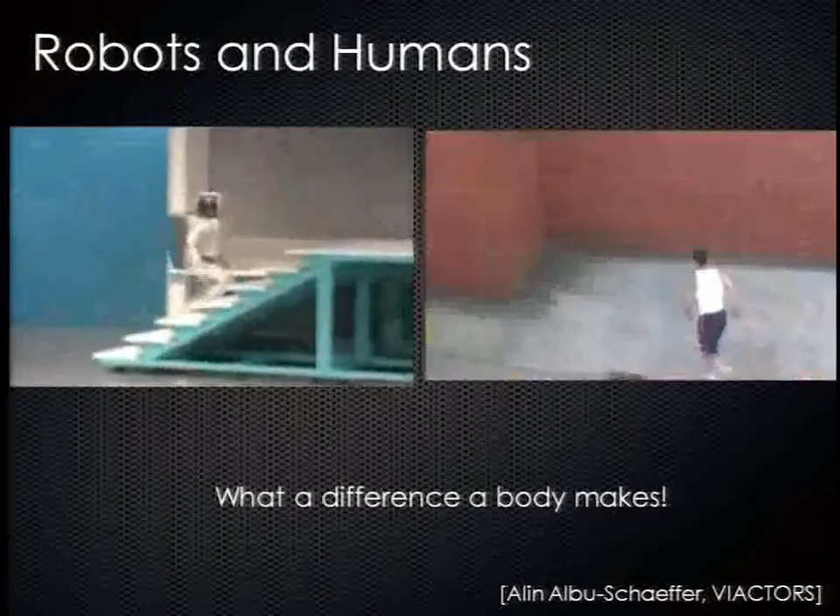This is a slide I borrowed from Alin Albu-Schaeffer, who has led a project on actuation and natural motion of robots for some years with us. The difference is the body.

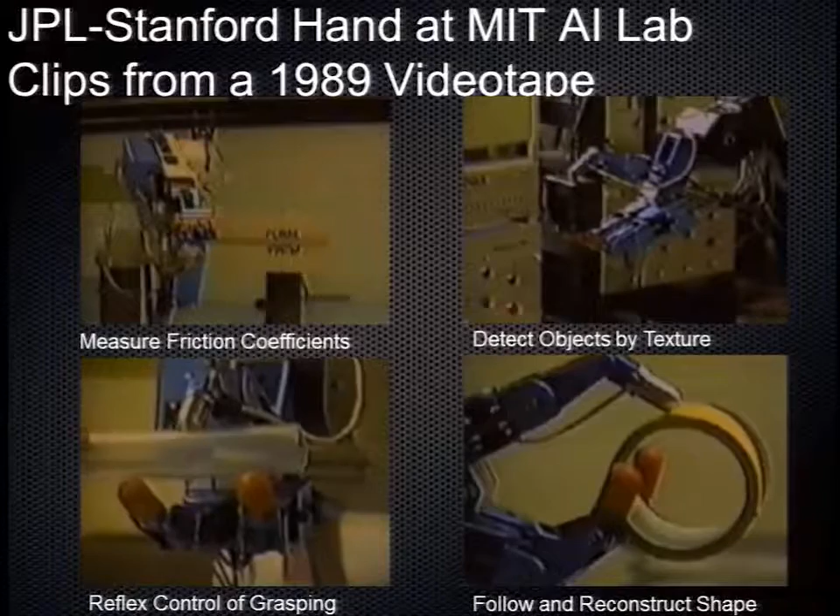Another topic of the talk is human hands and robot hands. We have seen robot hands of different types, some very beautiful hands, some being made now, some go back in the past, and some of these were really exceptional engineering feats. For instance, the JPL Stanford hand at MIT AI in 1989 was already capable of measuring the friction coefficients of objects by sliding a finger with a sensor, detecting objects by texture, controlling with reflex grasping, or following and reconstructing shape. This was back in 1989.

So why this kind of hand, or the other beautiful hands that we have had, didn't make it to the real world? You don't see them in industry, you don't see them in real applications, you don't see them in service. What is the reason?

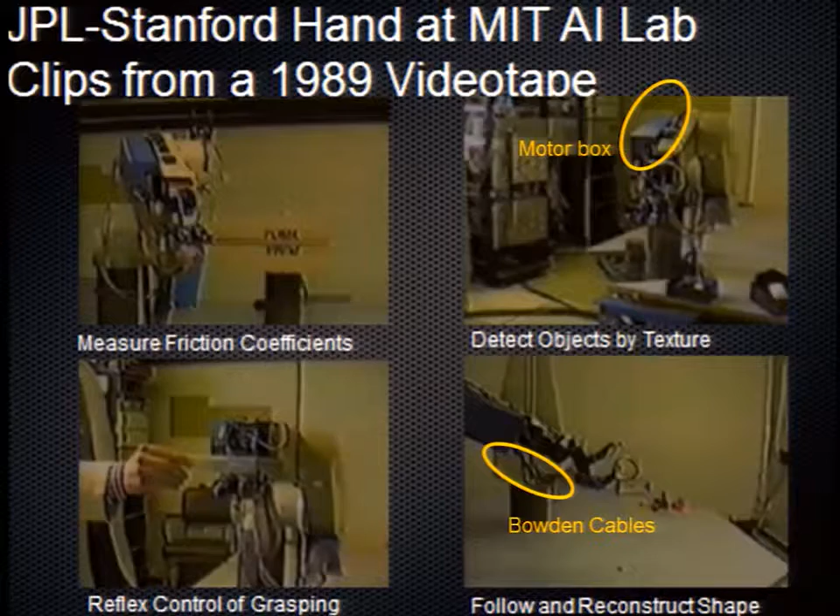Part of the reason is that machine motion is not good enough. At that time, we had a motor box that was much larger than the hand itself, Bowden cables that would break very often, unfortunately. But even today, recently we have made this hand that's rapid prototyping, more modern design.

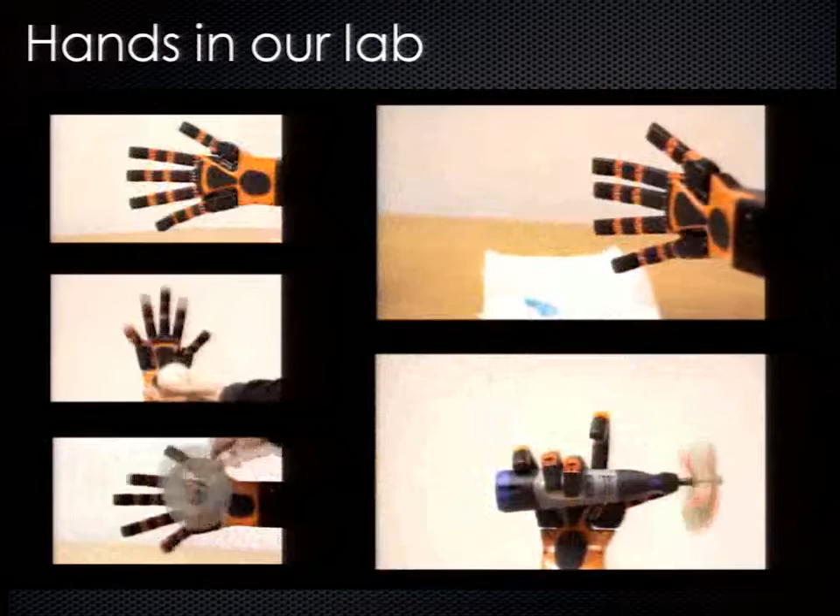You can do nice things. You can handle different objects. You can also manipulate a little bit, like a syringe or a Dremel. But things that are untold very often is that still the motor box is large, the tendons are fragile, and the programming of this hand takes a long time.

Now, programming might not be a big problem. If you are very good at programming, computational power is very cheap now. If you compare to yesterday's Pumas, for those of you that are old enough to remember, in a Puma we had 160 kiloflops back in the 80s. But today, the dumbest smartphone has 40,000 times the same computational power. So machine intelligence has gone a long way from there.

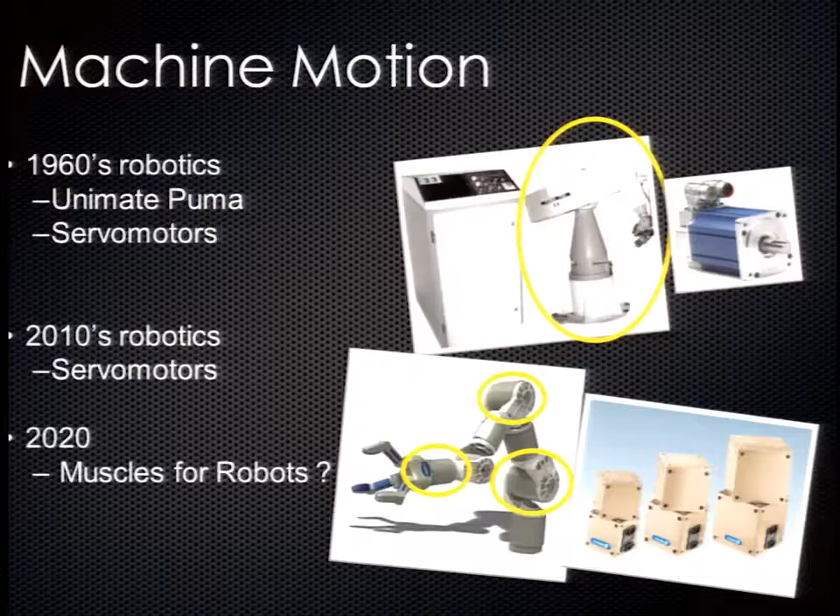But if you look at machine motion instead, in the 60s the Puma had servo motors, and in 2010 most robots have servo motors. We didn't make much advancement. I think it's time to move forward. By 2020, maybe we will have something different, maybe muscles for robots.

The body makes a big difference, and intelligence is related to the body. I don't believe in intelligence per se. I believe in robotics, the intelligence has to be embodied, at least in part, and I will argue on this.

Embodied intelligence, if you ask a philosopher, is the theory of having cognition that depends on the kind of experiences that come from having a body. And it concerns the fact that the very structure of reason itself comes from the details of our embodiment. But concerning the hand, for instance, there are claims that the modern human brain came after the hominid hand, meaning that the hand shaped the way we think and do things.

This actually goes much farther back in the past, to the 6th century before Christ, and Anaxagoras thought that man was the most intelligent of animals because he had hands.

What is embodied intelligence in a more precise sense? This is my definition. There are plenty of definitions, so I just said, why not one more? Property of a physical system, the body, to adapt and interact with its environment to naturally produce the desired function.

Body, environment, natural motion - I underscore this. Body plus environment make a function. I'll come back to this later on. How far are we from implementing any of this natural motion?

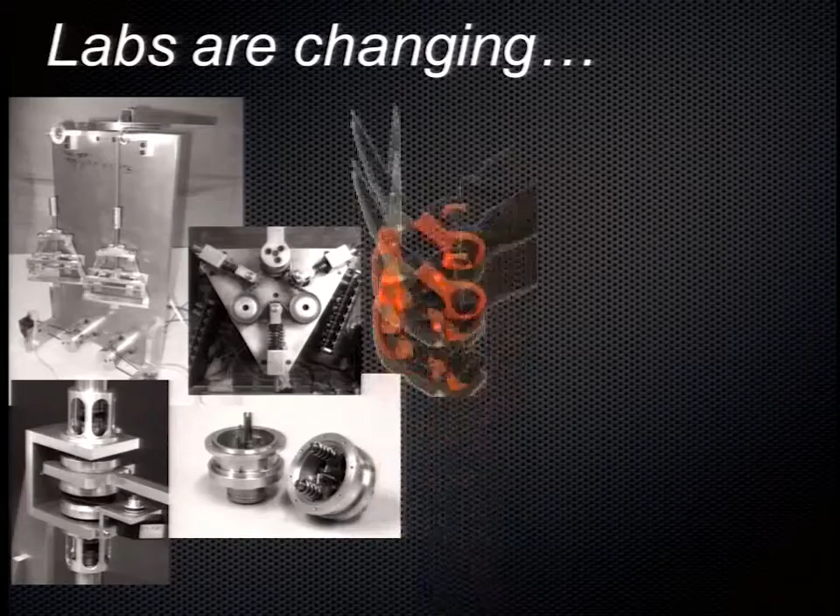There's some good news. We have been stuck for a long time with servo motors, but labs are changing quickly. These are pictures from my own lab a few years ago, and these are new things that happened in the last few years. It's much more colorful, for one thing.

The reason is new technology. Additive manufacturing is important - there are many different brands and things available. But also new embedded microcontrollers, the Arduino style, new sensors, magnetic sensors, Kinect - all those things we dreamed of some time ago. Hardware in the loop tools, new operating systems, software, middleware, toolboxes, ROS, YARP. Those things are making the cycle of innovation so much faster than we were used to, so things happen in the lab at a different time scale.

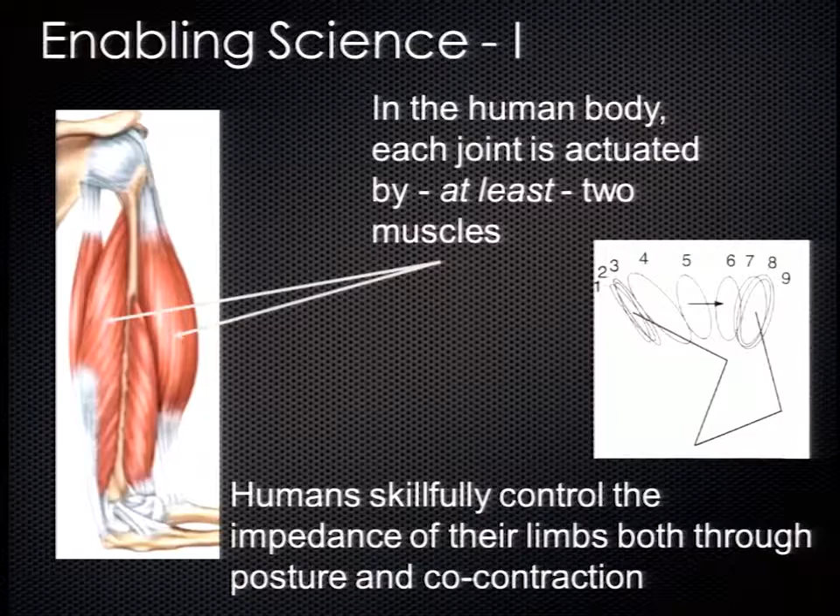Not only enabling technologies, there are also enabling science results that are changing the landscape. For instance, understanding how humans move helps us a lot. Everybody knows that each joint in the human body is actuated by at least two muscles, and there is a wealth of results on how humans skillfully control the impedance of their limbs through both control of posture and co-contraction of the muscles.

And there's another result from science I think is very important to us: synergies. Many functions of the human body require coordination of a large number of muscles. So in emitting a single phoneme, ba or pi, I'm using something like 40 muscles, going from the mouth to the tongue, to the pharynx, to the diaphragm, all coordinated to do ba instead of pi. So you may wonder, how can people speak and know what they're saying at the same time? Maybe not everybody, but...

There is scientific evidence for the existence of sensory-motor synergies. All of those muscles move together because they are considered as one unit by the central nervous system. So you don't have to think of this co-activation.

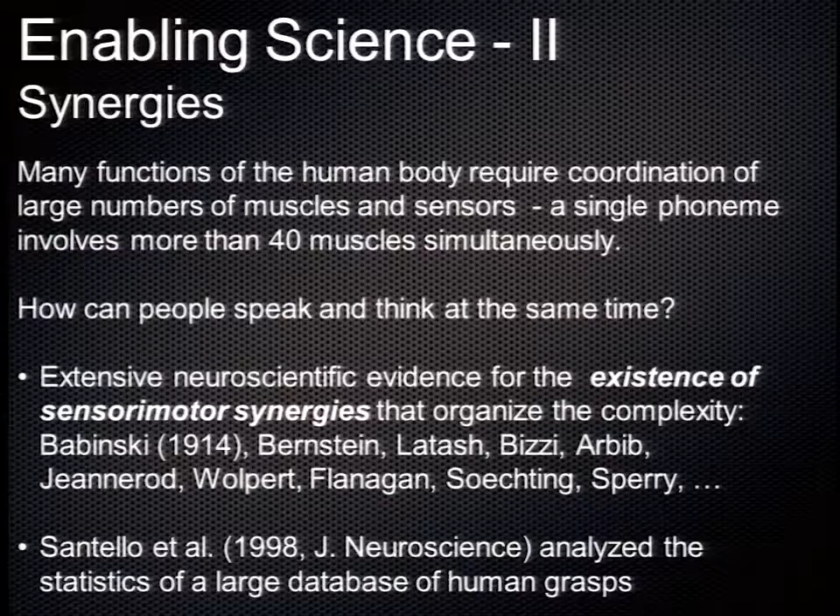For hands, Santello, Flanders and Soechting in 1998 analyzed the statistics of a large database of human grasps, and they came up with the idea of postural synergy. This is very simple: you look at the covariance matrix of how the joints move in a human hand during everyday tasks, and you take the principal component. You call the first principal vector the first synergy, and so on. If you use the first, second, and third synergy together, you build a subspace, and if you move in this subspace, you already explain 90% of the covariance of everyday grasp. Using just the first one, you already get 50% of the covariance.

It's a lot. So the problem is how to make robots that are soft yet strong, simple but also dexterous, intelligent, and practical. Our approach is mixing soft robotics technologies with the theory of human synergies.

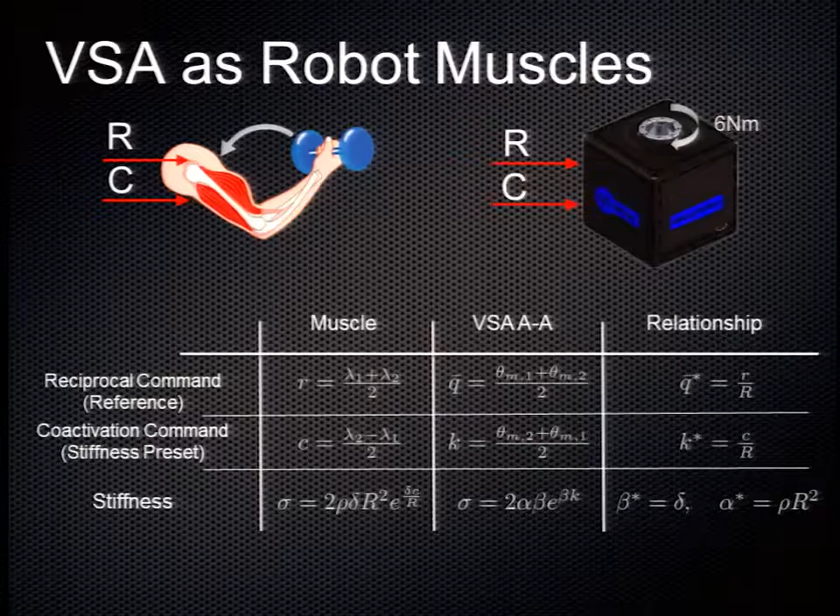So from the original models, we've been moving the scene forward - not just us, there's a whole number of people doing this. Series elastic actuators were introduced in the 90s, and more recently variable stiffness actuators, where motors can change not only their position but also their stiffness. In a way completely similar to the human joints, you can control the reference and the co-activation. In motor control, people call those reference and co-activation signals R and C, using lambda from Feldman's theories to define this. But in this motor, you can use exactly the same thing - you can control the servo motor with exactly the same inputs.

And you can choose the springs - this is the device we developed in the lab. You can choose the springs so that the characteristics are very similar to those of human muscles. That's why we call them robot muscles.

We have been seeing many devices, we have been designing many devices, and it's still important to go forward and build new actuators. But it's also time to move forward, in my opinion, and I believe that naturally moving machines might have more applications than we imagine.

So we started with this idea of crowdsourcing the exploitation of the technology, making it readily available, creating a community, sharing fully the design - fully open hardware and software, making it simple to program, modular hardware and software, low cost - so that everybody is able to use variable stiffness actuators, or muscles, to build their own robots.

So that's why we started this natural machine motion initiative to foster the diffusion of soft actuation for robots that move like we move. Here is the website we've started. You can put there your own drawings of your own device, schematics, instructions, actuators, accessories, or you can download and print out that cube I showed before and use it in your lab.

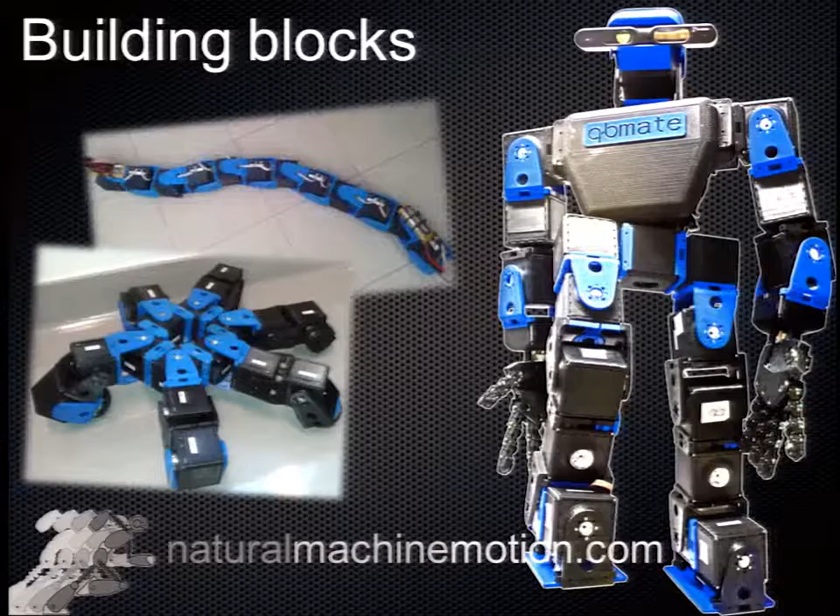Those cubes can be used as building blocks for doing a snake, a hexapod, or a humanoid that has the possibility of controlling the stiffness while it moves, co-contracting just like humans do.

But let's go back to hands. The first synergy alone explains 50% of the covariance, so we say, why don't we start from there? If you move a hand according to the first synergy alone, you have a single degree of freedom, basically. It's a subspace where you coordinate motion.

That is not enough. The idea of synergies alone is not enough to grasp an object, because if you close your hand, either you're not grabbing the object, or if you do, you crush it. That's not the point. So putting together soft technologies and synergies, you can explain perhaps how you can control the hand.

So the idea is that you have this reference position, the mesh hand, and the real hand. You can control the reference R on this manifold of the synergies, and then the stiffness. So the force is generated via the error between the real hand and the reference hand, times the stiffness that you control. This sounds like a nice idea.

Can we implement it? From theory to practice, there is need for some more radical changes in the design. So we started implementing a new hand that substitutes joints with roll-articular pairs and has ligaments that are elastic.

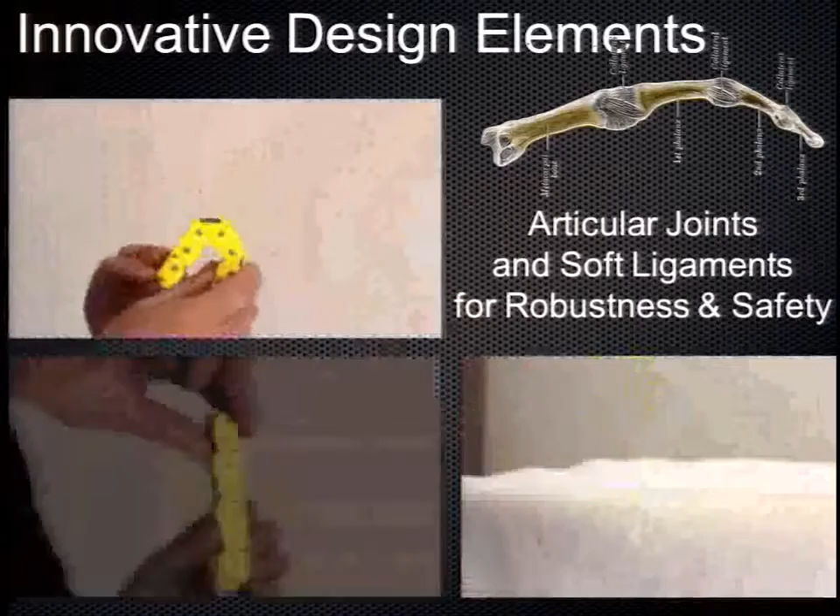So each finger can be deformed, can be almost torn apart, and goes back in position. So it can withstand impacts. This is the Pisa-IIT SoftHand that we put together.

And here are the very first experiments with that. The hand moves and can comply with different objects. You can observe that the shape of the hand is different depending on the object itself.

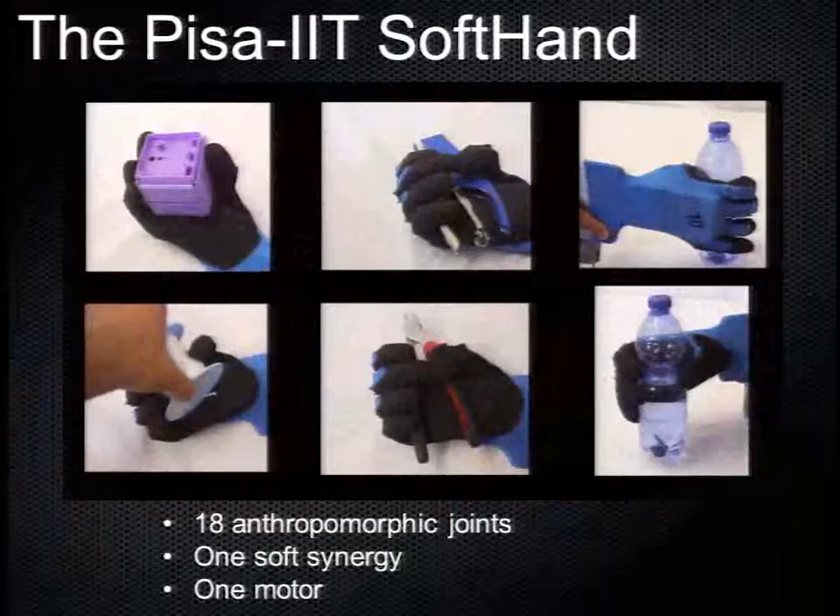The hand has 18 anthropomorphic joints, one soft synergy, one motor. Here is the hand grasping different objects. And here it's grasping handles.

The hand can be mistreated, even severely. You can slam it on a very rigid environment.

Now, how do we use this kind of hand? We thought it was interesting to learn from humans how to use a robot hand. So we made a little interface for a human to use the hand.

It turns out that humans can use the hand in a very natural way, as you can see here. Possibly it's the fact that the hand is so anthropomorphic, not only in the way it looks, but also in the way it moves, according to this first synergy, that makes it fit the body schema of the person.

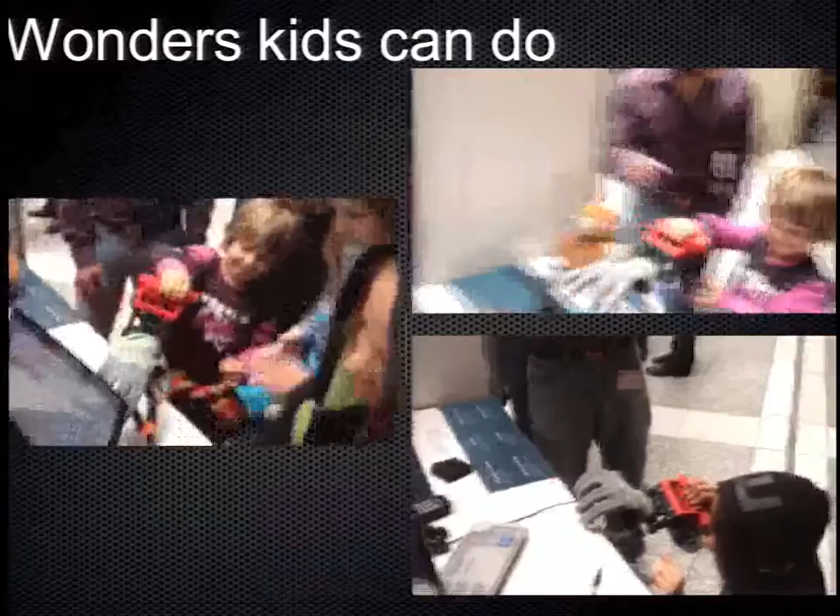And kids can do wonders. We were very surprised by this, and we learned a lot, because kids were able to do things we never thought the hand could do, like picking a coin from a table.

And they were using deformations of the hand, purposefully, they would deform the hand to do the task. So we started using this idea, and then we went further.

You can use the hand as if it's your own. Recall that the hand has 1 degree of freedom, 1 motor, but has 18 joints. And you can deform the hand on purpose for doing tasks.

So, for instance, you can push the hand against the environment to shape it. You can grab a ream of paper. And then, in the same way, you can also softly take one sheet of paper out of the same ream.

Pushing a button was not originally planned in the design of the hand, but you can do that. The hand is pretty strong, so you can also use the fire extinguisher, which is 10 kilograms heavy.

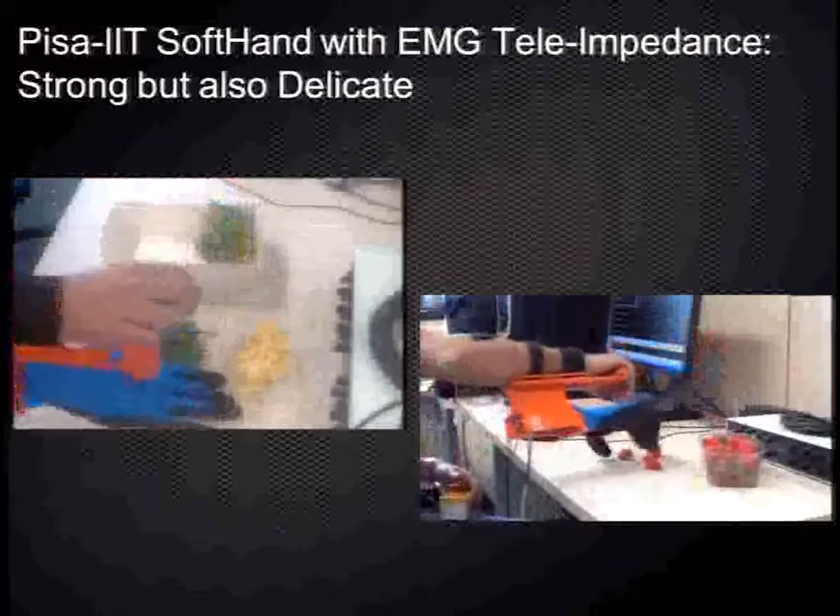The hand can also be delicate. If we control both the reference and the stiffness, we can do things like handling strawberries or noodles like this. And finally, you can get some dexterity by exploiting the environment constraints.

So this is the key message, I think: if you exploit environmental constraints, you can do things with hands that you probably didn't think of before.

So the question is, can we program a robot to use a soft, simple robot hand as effectively as humans do? Using simple, soft hands changes the grasp planning deeply, I think. Thinking of where to place your fingertips for maximizing force closure measurements, for instance, might be less important. I've been working on these problems for years.

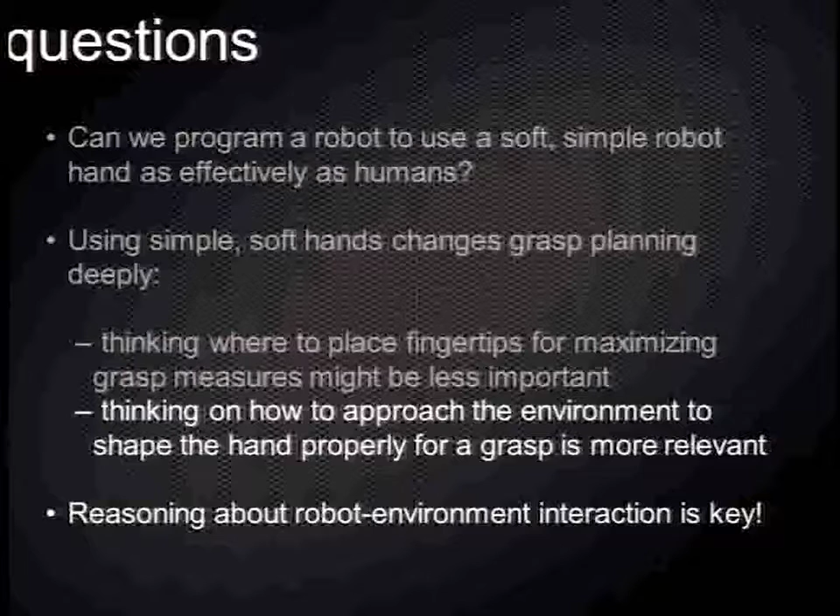But if you look at the classical literature pictures, what strikes me is that in all of those, there is no hand, while hands are central, and the physics of them is important. Thinking of how to approach the environment to shape the hand properly for a grasp is more relevant. Reasoning about robot-environment interaction is key to me.

So here is one example of what I mean. This is a very simple example. You are grabbing the mug with the same hand, the same object, the mug, and the same on-off control. But once you are taking it from the top, and once you are taking it from the side, it's 2 different grasps, and you can see that the hand does 2 different things depending on the affordance.

So the control is the same. The control is open or close, as simple as that. The hand has 2 different shapes. So programming time is 0 - well, I shouldn't say so. Programming time is what it takes for you to know where to put the hand at the very beginning. This is what I call body-environment interaction that gives you a function. This is what I call embodied intelligence.

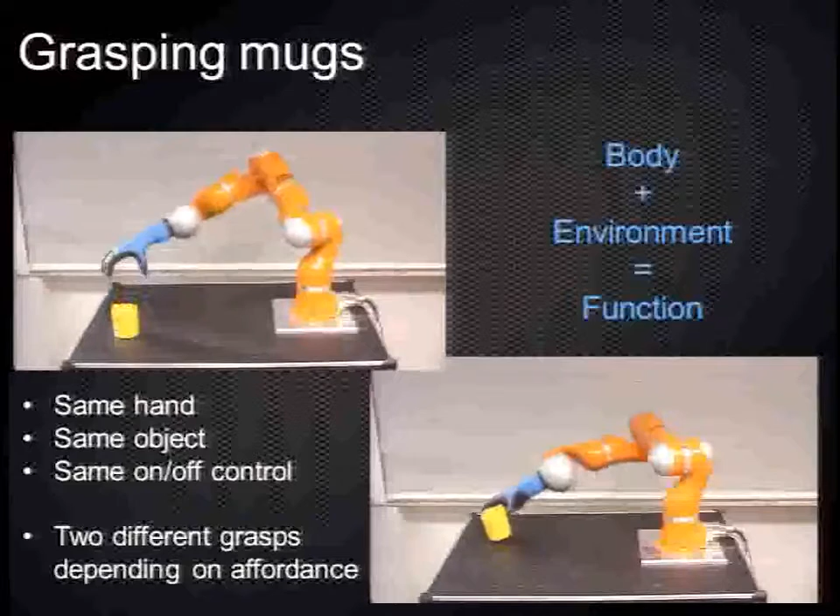Let me close with an application I'm very interested in these days: the SoftHand. This is in collaboration with some hospitals in Italy and also in the United States. The hand is very simple and probably robust and low cost enough to be useful.

And here you can see the first experiments with amputees that are using the hand. These are very preliminary results, so the hand is still to be optimized, but you can see that they very quickly learned how to use this hand, and they're very happy.

Here are a few more. You can use the hand as if it were your own. It moves like your own, and you can do things like managing tissues or a group of cups. Here is the hand opening, turning a key, and opening a door.

There's a lot of work to do, but we believe that this will impact somehow the possibility of giving hands to people at a reasonable cost that are robust and can be useful and have an impact on real life. These are the people that have done most of the work, and these are the sponsors, and thank you for your attention.

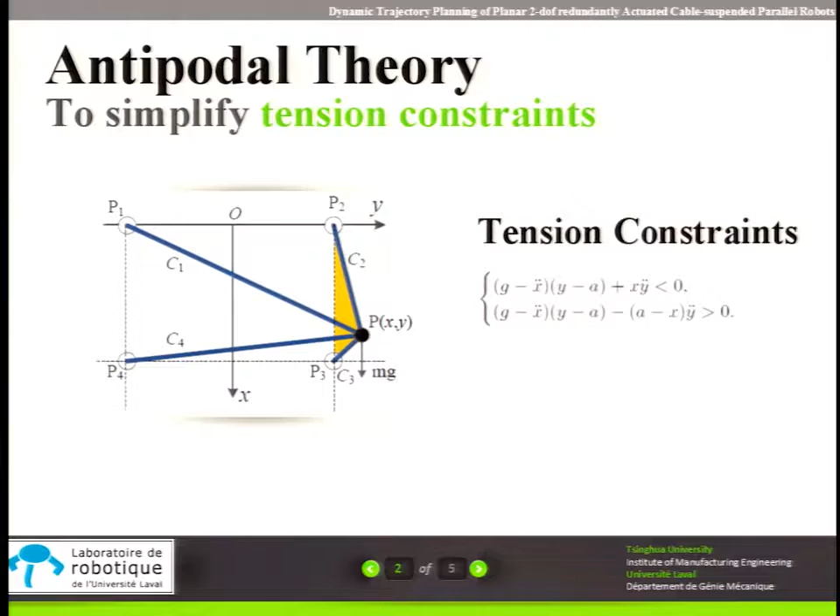For instance, considering the configurations in the left figure, cable 2 and cable 3 form a sector containing cable 1 and cable 4. If the cables at the boundary of the sector are in tension, then the cables inside will be in tension as well, automatically. So the 4 cable constraints can be simplified to only 2.

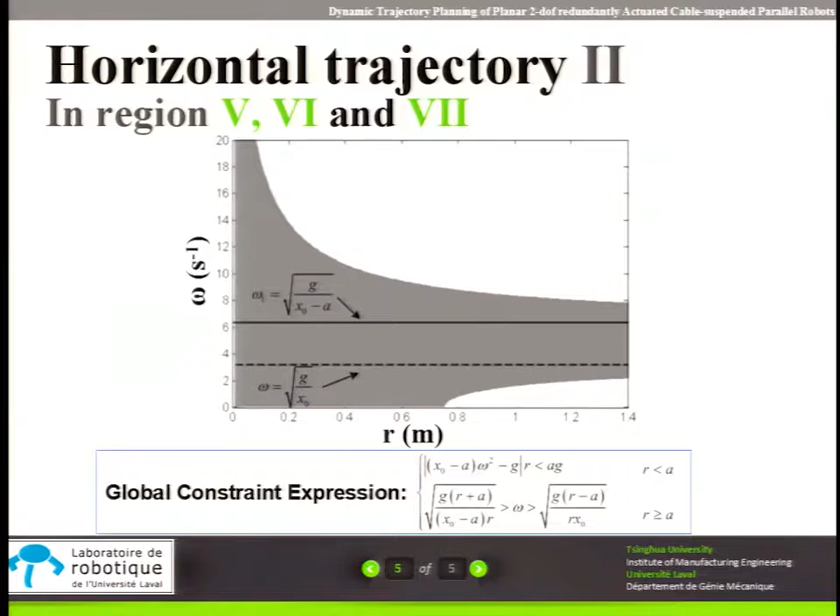Compared to previous research, we can conclude that redundant actuators can greatly enhance the capability of dynamic trajectory planning for cable suspended robots. If you come to see my paper, I can show you some videos of experimental validation. Thank you.

Hello everyone, my name is Hamed Khakpour, and today I'm going to present the work I have done with my supervisor, Dr. Lionel Birglen, from Polytechnique de Montreal. It's about augmentation of the workspace of a spatial cable robot with 3 degrees of freedom using a differential system.

As everybody knows, cables can only pull objects, not push them. So in a cable robot, to fully constrain the moving platform with n degrees of freedom, at least n plus 1 cables are required. It's also shown in the literature that if more cables are used in the structure of a cable robot with proper design, a larger workspace can be expected.

However, using more cables results in using more actuators, which itself results in higher cost of the robot and more complexity in controlling the mechanism. So we have proposed using differential systems in the structure of cable robots to improve their workspaces while keeping the number of actuators at a minimum.

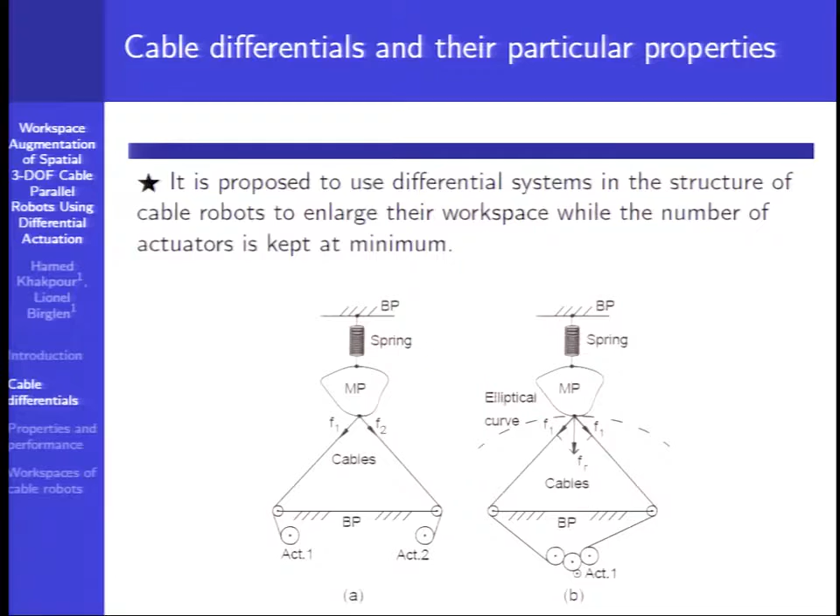We have shown that there are some differences between their performance with respect to the fully driven one, and this is discussed more in the paper. These cables have some particular properties which are helpful in the design of cable robots.

In this work, we have mainly focused on spatial cable robots with cable mechanisms, and we have shown that these mechanisms work similarly to a single cable system in which the attachment point to the base platform is moving on a plane.

We have used this cable differential in the structure of two cable mechanisms. On the left, you can see a cable suspended robot, and on the right figure, you can see the fully driven, fully restrained cable robot.

We have calculated their workspaces—the wrench closure and wrench feasible workspaces—and compared them to those of fully driven cable robots with similar structures and the same number of actuators. We have shown that using these systems, we can achieve better and larger workspaces.

I would like to talk more about this work in the interactive session, and I would be happy to see you there. Thank you very much.

Hi, I'm Shouhei Shirafuji, and I'm a PhD student at Osaka University. The title of my paper is Tendon Routing Resolving Inverse Kinematics for Variable Stiffness Joint.

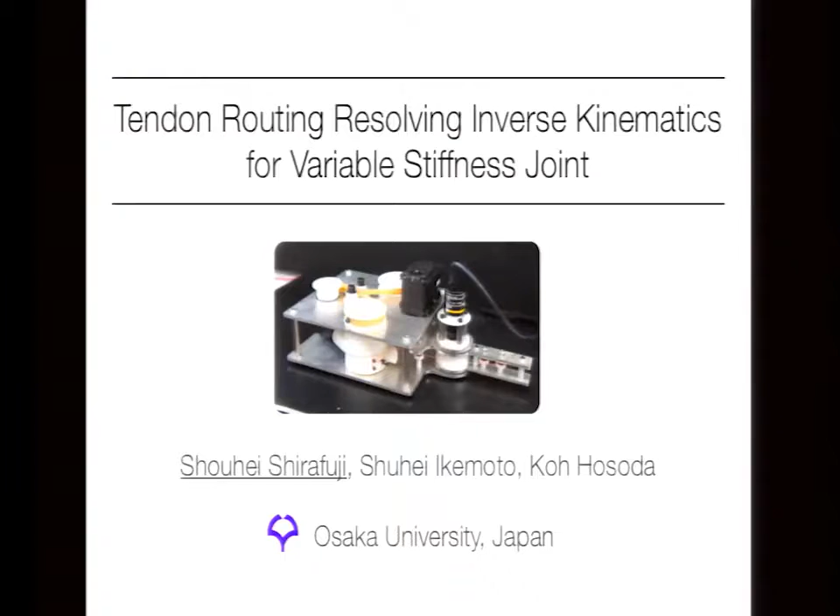Variable joint stiffness is one of the important functions of the human musculoskeletal system to accomplish various tasks adaptively. One of the typical methods to realize variable joint stiffness is using a tendon-driven mechanism and nonlinear elastic components. In this method, the joint stiffness is adjusted by pulling several nonlinearly elastic components, preventing movements of the joint, as shown in this figure.

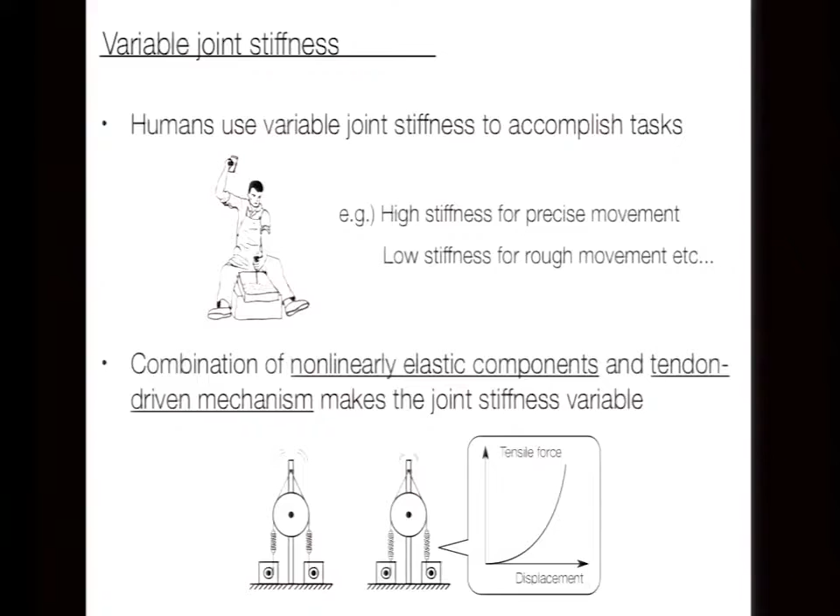We have to control motors to adjust joint positions and stiffnesses, considering the complex relation between the joint positions and joint stiffnesses carefully. The control of them would be simplified if there were a mechanism to separate the control of joint positions and stiffnesses mechanically.

In other words, complex calculation is not needed if we can control the joint positions and stiffnesses by separate motors independently. In our paper, we propose a methodology to construct such a mechanism, which we call tendon routing resolving inverse kinematics. In short, we call it TRIK.

This is one example of TRIK for a manipulator with 1 degree of freedom and nonlinear moment arms. TRIK is composed of step pulleys and moving pulleys. We can adjust joint positions and stiffnesses of this manipulator by driving two separate motors through the proposed mechanism.

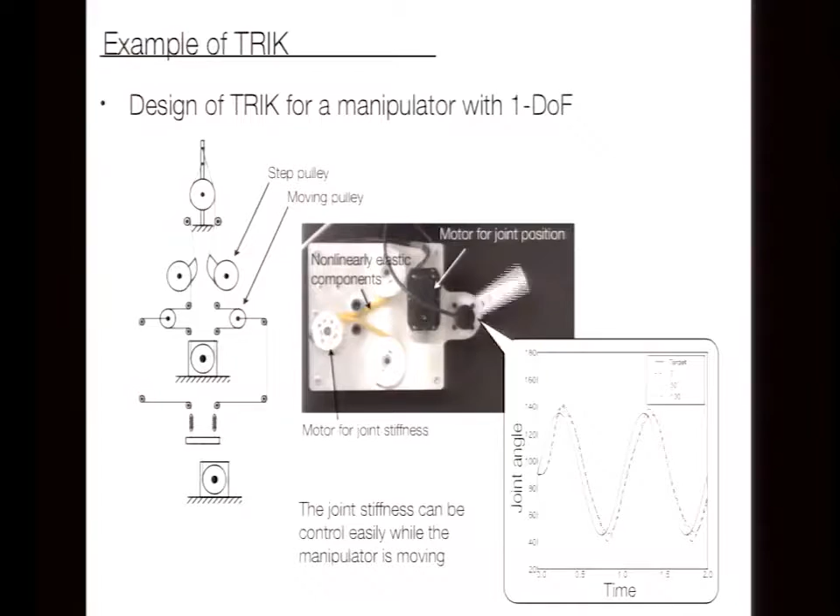It makes it easier to change the joint stiffness while the manipulator is moving. We can construct such a mechanism for various tendon-driven mechanisms. Thus, in the interactive session, we will introduce the detail of the methodology to design TRIK for given tendon-driven manipulators, including manipulators with multiple degrees of freedom. Thank you.

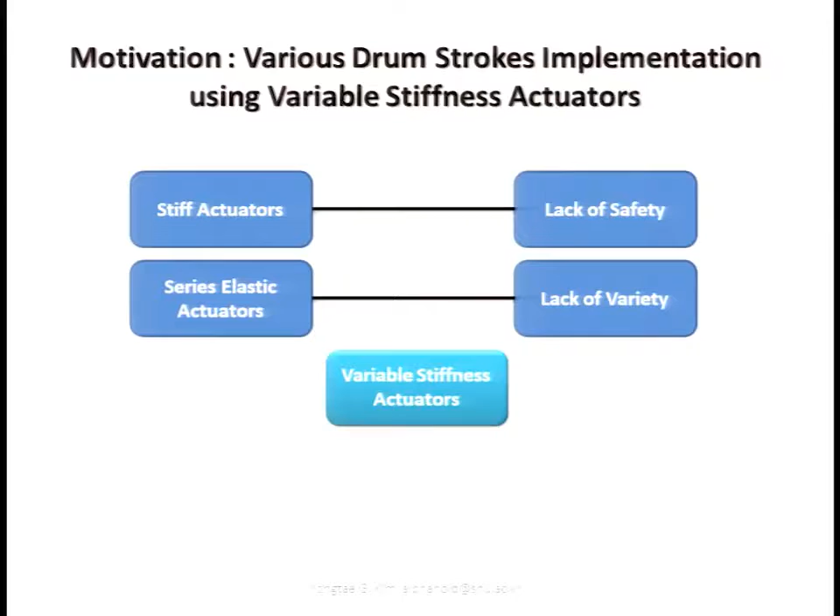So what is the various stroke? There are two kinds of strokes in the drum stroke field. The single stroke makes one sound with one swing, and the double stroke makes two sounds with one swing. So we implemented drum rolling using double strokes.

For the drum rolling, we modeled the physical relation between the drumstick and drum membrane, and we also found the proper stiffness for the drum rolling, as shown in the green box.

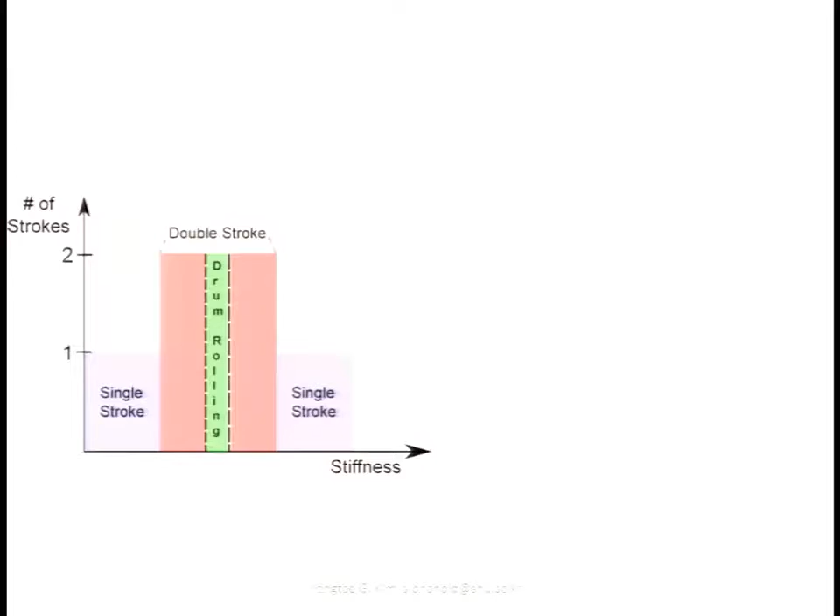In double stroke, the core variable is the stiffness. The responses vary with the stiffness variation. At high stiffness, there are no bounces and only single strokes appear. If the stiffness is decreased a little, bounces appear and double strokes start. There is also a region that allows drum rolling.

This means the first stroke and the bounce stroke come out after the stroke, making sustainable strokes. If the stiffness is decreased even more, there are no bounces and only single strokes appear. So let's see our video.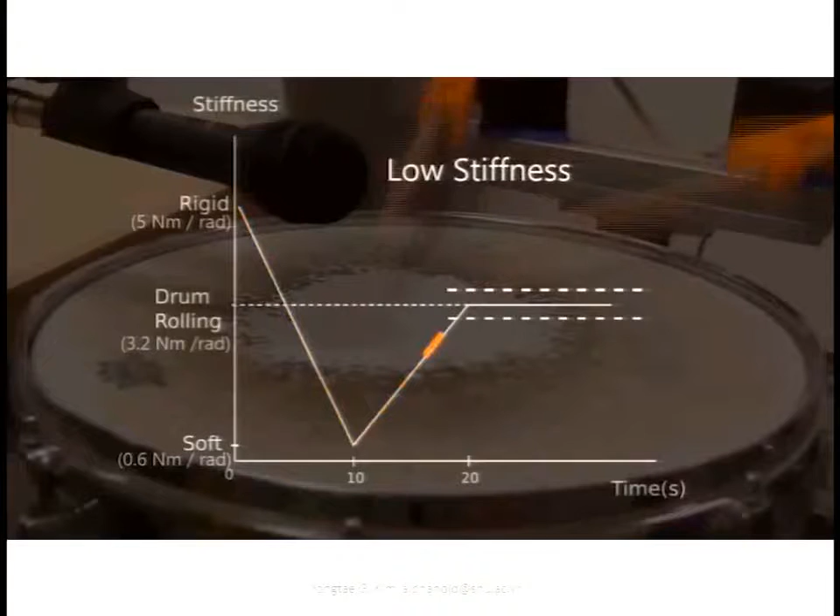This video shows the stiffness variation and how the response changes with stiffness variation. There are some regions that allow for this, and this is the rolling region.

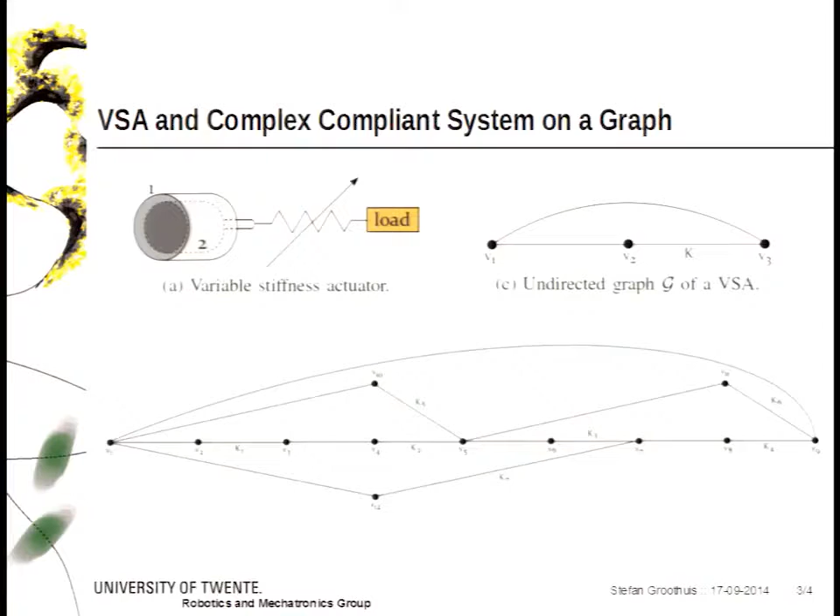Now we can optimize the design of this system. Suppose I impose a task on this load, like this back and forward motion, and let an optimal controller choose the optimal stiffnesses for the 7 actuators that drive these 4 loads. We can see that for 2 actuators, the stiffness is indeed changed during the performance of the task. For the rest of the actuators, they are kept constant. So it's not necessary to put an expensive, heavy, and difficult variable stiffness actuator in these locations.

So these correspond to this and this. This actually leads to design guidelines for complex compliant systems.

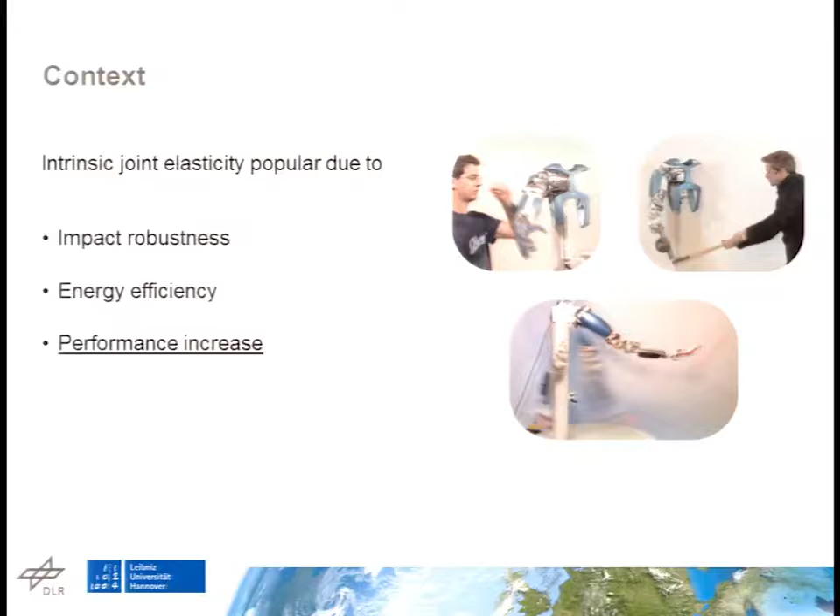In particular, we consider two problems. The first is which states can an elastic joint with limited dynamics reach from equilibrium? And the second is how can an elastic joint robot be stopped as fast as possible?

First, we use a simple 1 degree of freedom elastic joint model where the motor velocity and the elastic deflection are bounded. For the first problem of reaching desired states, we find the reachable set in the phase plane and derive the time optimal trajectories. We also analyze the influence of all joint parameters on the maximum velocity.

For the second problem of braking to equilibrium, we take the same approach and also find the brakable set in the phase plane and the according trajectories. Having found the reachable and the brakable set, we combine these in order to analyze the overall joint performance, and we find parameters for good energy storage and release capabilities.

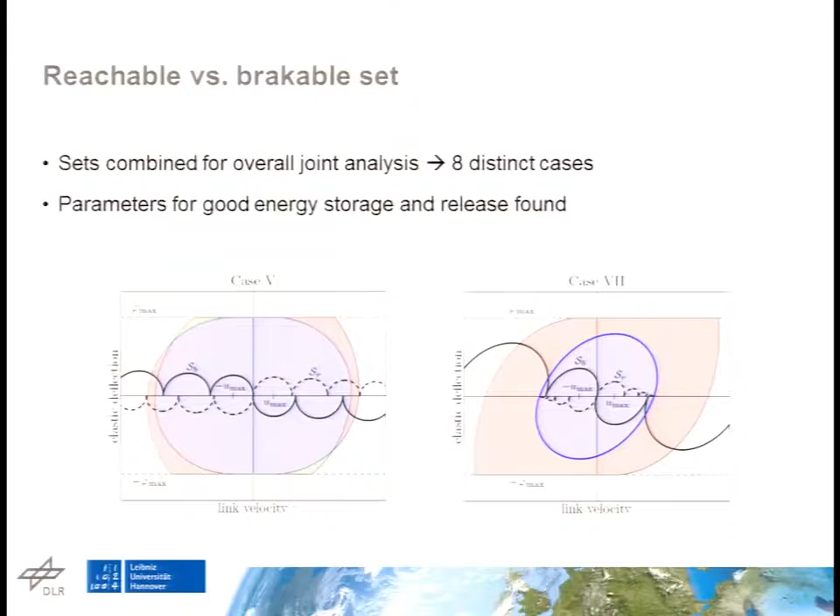Finally, we extend our methods to n degree of freedom braking of elastic robots by using a decoupling approach.

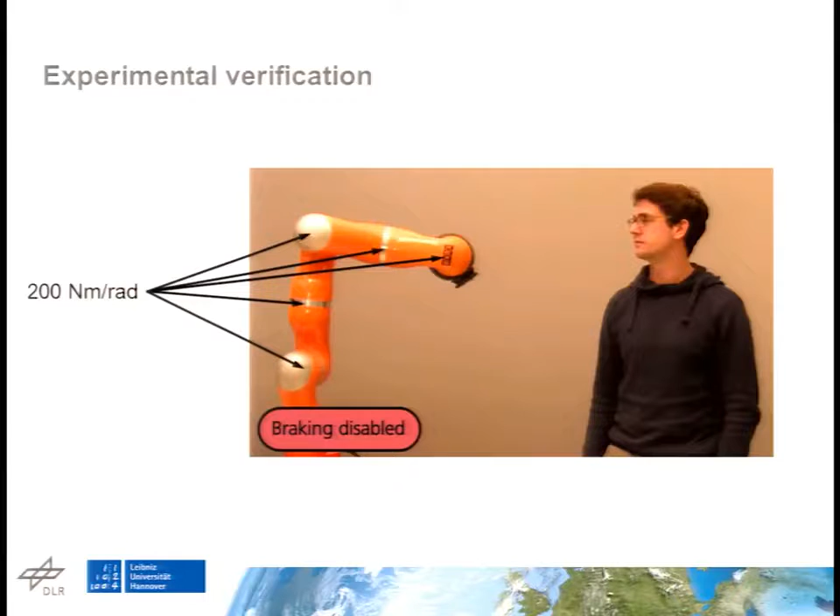Now I'd like to show you a video that illustrates the performance of the controller. We use a KUKA lightweight arm and emulate joint elasticity by joint impedance control. First the robot is undamped and it shows strong oscillations. After activating the controller, the robot stops quite quickly and afterwards shows is very strongly damped.

If you'd like to know how it works, please meet me at the interactive session. Thank you.

Hi everybody, my name is Matteo Lasagni, and I'm here today to present you a shape-shifting display based on force guiding particle chains.

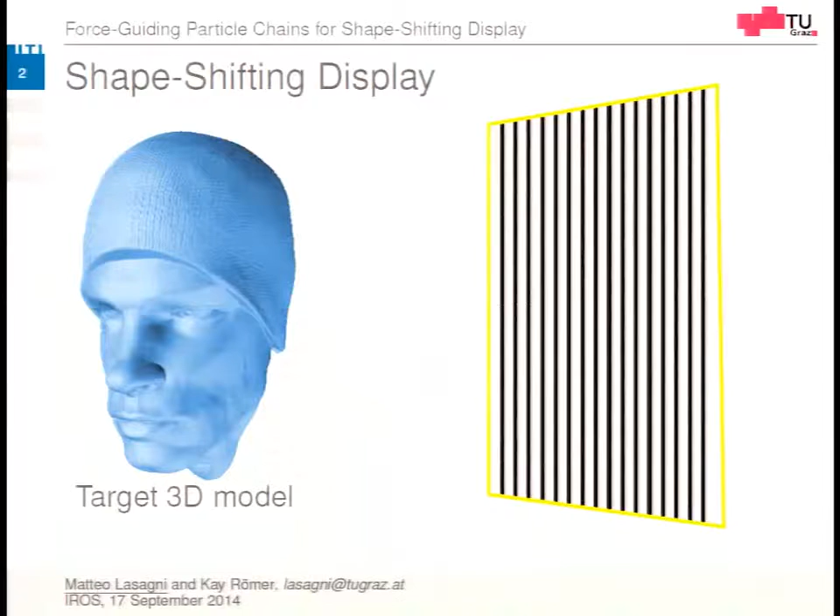A shape-shifting display is a screen made of tiny robotic particles which is able to take on the form of a target 3D model. Each particle is indeed able to interact with the other particles and rearrange themselves into a different shape.

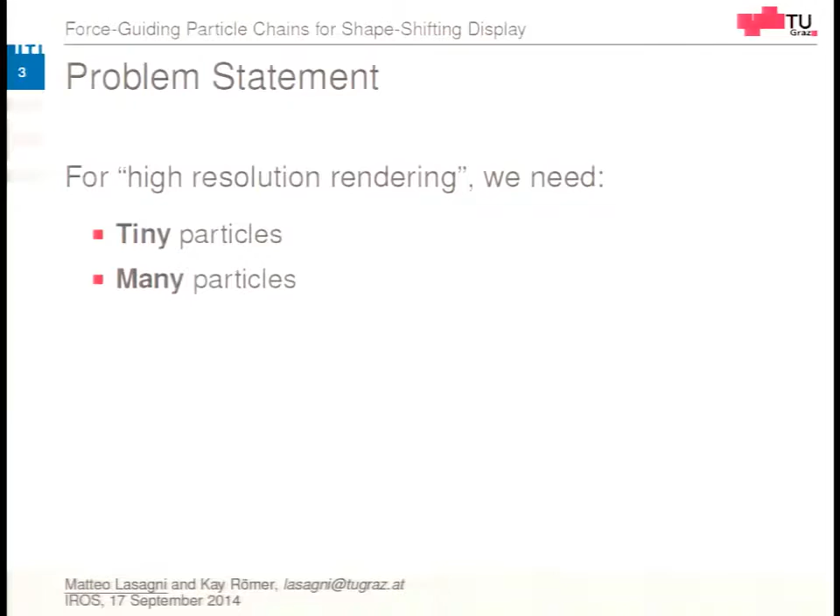If you want to make a high-quality display, one with high resolution, we need to combine together tiny particles in a large number. But here we come into scalability problems, because if you have many particles which have to stick to each other and which are able to change their connection dynamically, we need to build in each particle strong actuators and latches. But in general, the strength of an actuator grows with its size, and because of that we run into a problem, as the particle would also have a constraint on the minimum size. To overcome this problem, we devised a system in which multiple chains are arranged regularly one beside the other to form a foldable surface.

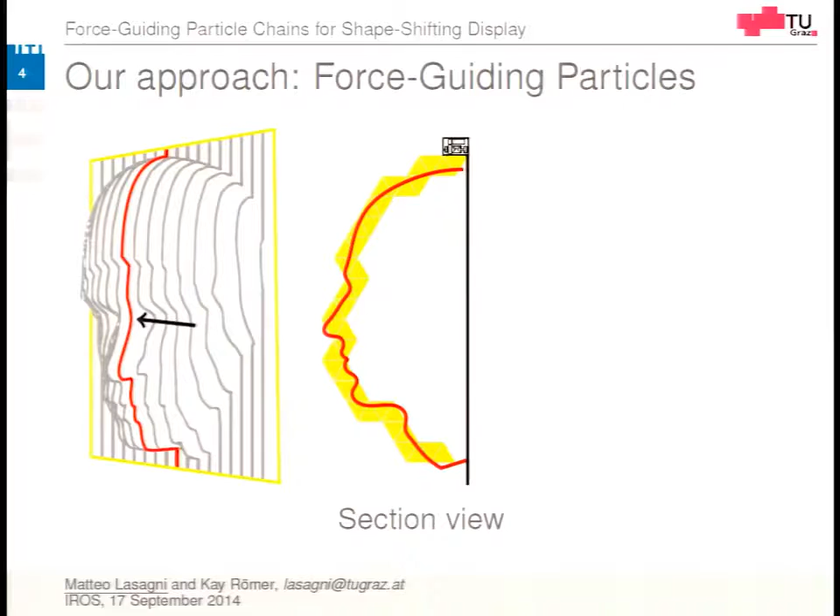Each chain that you can see here can fold and outline a corresponding slice in the target 3D model. To simplify particle design, instead of having a strong actuator within the particle, we concentrate the actuation outside the chain, in a way that a single external actuator exerts a compressing force on the chain and therefore on each particle by means of these two tendons.

Each particle embodies a very simple and weak actuator inside that slightly deforms the particle in order to exploit the external force and fold the chain. This is why we called our approach force guiding particle.

In this way, we have been able to build a shape-shifting display that can show arbitrary shapes. Having a single external actuator lets us build a system with an arbitrary number of particles, because if you have a larger number of particles, we simply increase the strength and the size of the actuator.

The simple design of each particle lets us make particles that are very tiny, and in this way, we have a system that is scalable and flexible. Thank you very much.

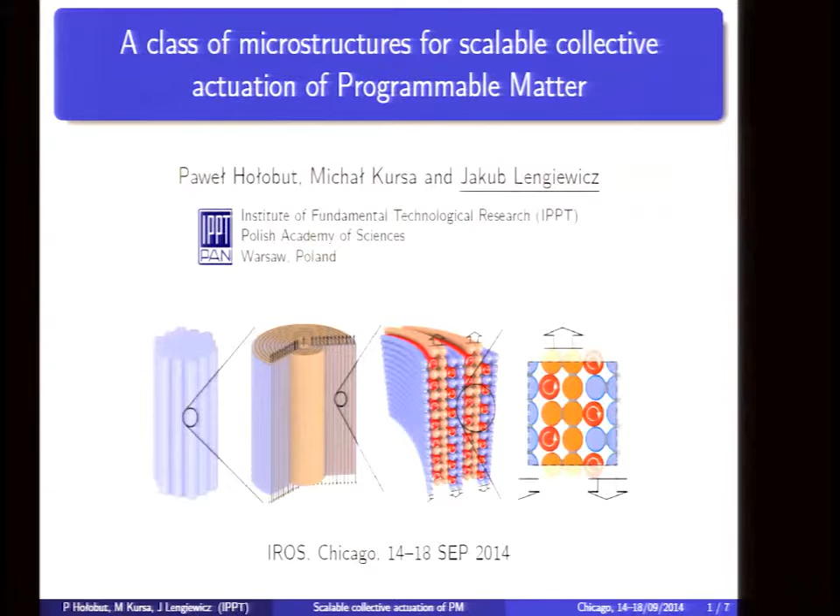Good morning. My name is Jakub Lengiewicz. I will present the joint work of my team on one of the important features of programmable matter, which is the ability to perform mechanical tasks.

Programmable matter is a concept of future metamaterial that can autonomously assume any desired shape or perform some other mechanical tasks. For example, it can lift a load.

Currently, the most advanced approaches to the realization of this technology come from the field of modular robotics. However, a number of problems have been encountered, mainly issues of miniaturization of modules and cooperation of many tiny modules to do some desired task.

We base our analysis on the concept of spherical modules proposed by the Claytronics team from Carnegie Mellon University. The Claytronics design seems suitable to be miniaturized, as it doesn't possess any moving parts.

The basic actuation mechanism is controlling electric fields beneath the surface so as to move two modules around each other. The strength of such an actuation is relatively high, but it is still too low to carry the collective weight of the modules in moderately large structures.

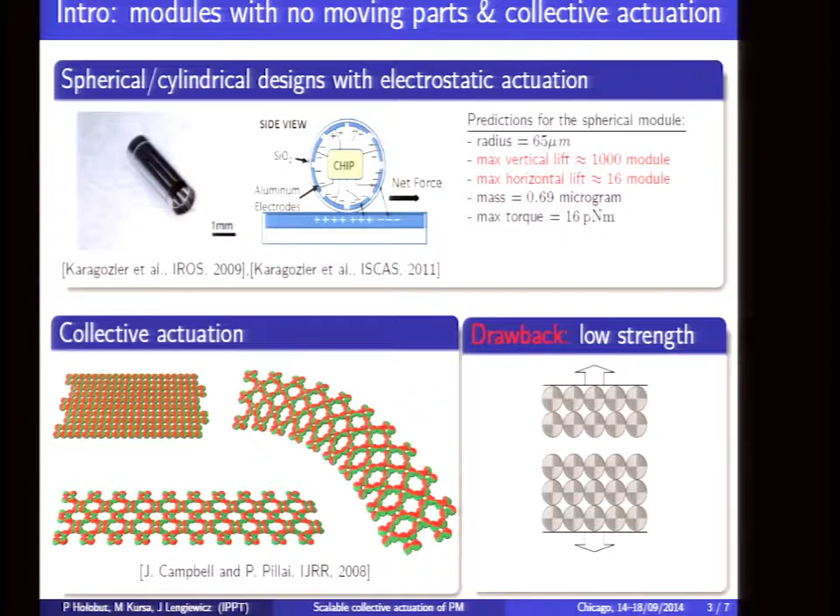This is because the overall strength of such structures is quite low. Our idea is to equip the modules with a secondary connection type, the strong connections.

Strong connections can make it possible to build durable and rigid frames, which are then moved in opposite directions by propelling modules, producing the overall force. So we call this actuator microstructures because of the microstructure of this.

We have developed several types of actuator microstructures and several variants of each of them. The linear actuator seems to be the most promising, but there are some others, so-called pump actuators and the rotor actuator. They have some particular advantages as well.

We have analyzed the proposed actuators both analytically and numerically using a properly adapted discrete element system. The results prove that the overall force scales with the volume of the structure. For example, in one of the analyzed cases, the actuator can lift 8 times as much as it weighs itself.

I will be pleased to discuss the topic in more detail during the interactive session. Thank you for your attention.

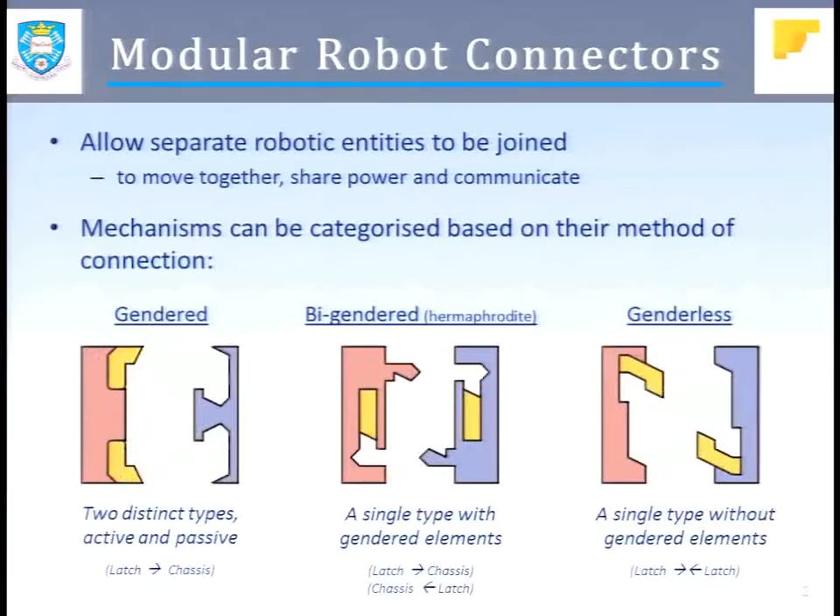We have developed this high-speed genderless connection mechanism that, to our knowledge, is an order of magnitude faster than existing genderless approaches. Because of its genderless design, it allows either side to disconnect in the event of failure. Other features of it include self-separation and electrical pathways.

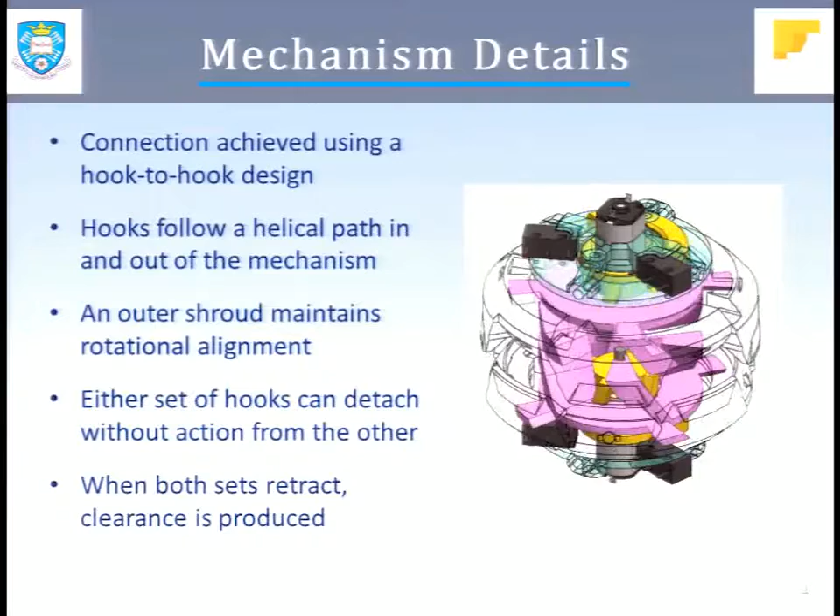The connection between 2 HiGen units is achieved using a hook-to-hook design. Hooks follow a helical path in and out of the mechanism, latching underneath the opposing connector's hooks. An outer shroud translates with these hooks to maintain rotational alignment. Because of this hook arrangement, either set of hooks can freely detach without action from the other. When both sets are retracted, clearance is produced, aiding self-reconfiguration in large modular configurations.

To verify the connector design, 2 units were produced and 3 main experiments conducted. We were able to verify the high-speed claim by measuring the actuation and connection time to be under 0.3 seconds. 200 trials were conducted to test the unit's ability to handle misalignment, and we were able to test that the unit can handle a vertical load of at least 2 kilograms.

Single-sided disconnect was also verified as part of this testing when resetting the experiments between each of the misalignment trials.

Thank you, and I look forward to talking about this more in the interactive session where I have a few samples with me.

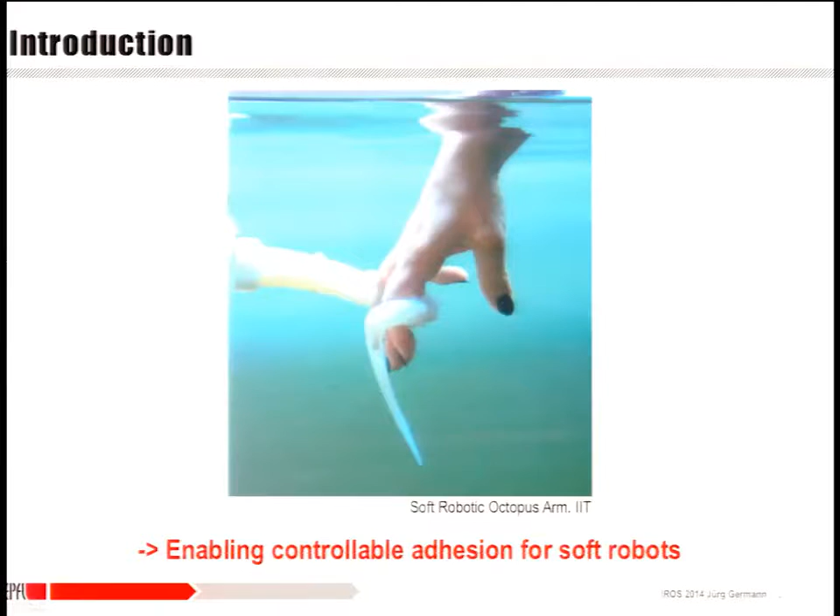This is what we focus on here: enabling controllable adhesion for soft robots, and more specifically, developing stretchable electroadhesion. The way electroadhesion works is that flexible electrodes with a specific pattern are embedded into a polymer, and by applying a high voltage to the electrodes and approaching a surface, adhesion forces are set up between the pad and a substrate. In this work, we wanted to investigate how the adhesion forces develop when electroadhesive pads undergo large mechanical strains.

We came up with a simple fabrication process for stretchable electroadhesive pads, and we fabricated samples with different electrode geometries. In order to assess the performance of the pads, we also developed an experimental setup to characterize the normal and shear attachment forces under different strains.

One of the striking results of our experiments is that the normal forces decrease with stretching the electroadhesive pads, whereas the shear forces actually increase with a higher stretch of the pads. We believe that this is due to an interplay of mechanical and electrical effects that happen when stretching the pads. Now I'd like to show you a little video that shows this work.

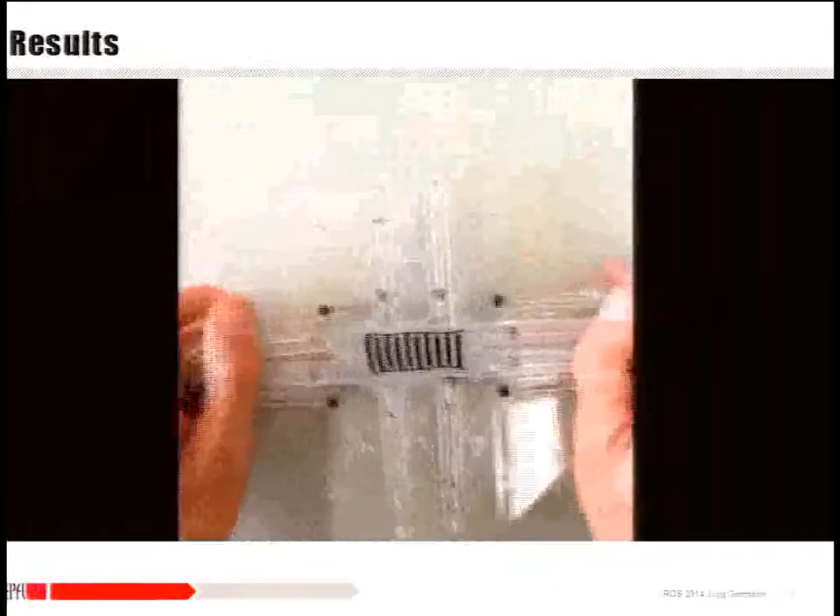Here you can see the soft and stretchable electroadhesive pads. For our experiments, we have this stretcher, so we can stretch the pads in two axes. Here comes an example that shows that the shear force under low strain is actually lower than if the pad is higher stretched, such as we can see it here.

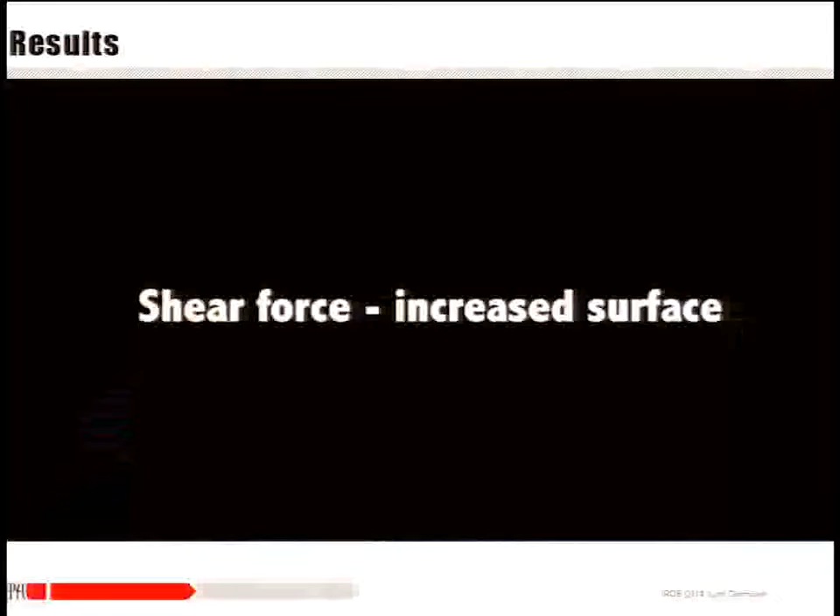Another advantage of the higher stretch is that the surface area is increased, which means the shear force can be further increased by having a greater surface area.

Another example of what we did is we strapped it over a finger, and we show something that a human being could not do with just one finger. Also, just to show the potential of that force, it's holding up a robot here. I'd be happy to talk more about this with you.

Hello everyone, my name is Rachid Bekhti from École de Technologie Supérieure in Montreal. Today I'm going to present our work on a new design method for multi-axis force sensors.

There are three important questions. The first one is why multi-axis force sensors are important. Over the last years, there has been a strong desire to bring robots into the human environment, and force sensing capability is one of the key features to help with better and safer interaction.

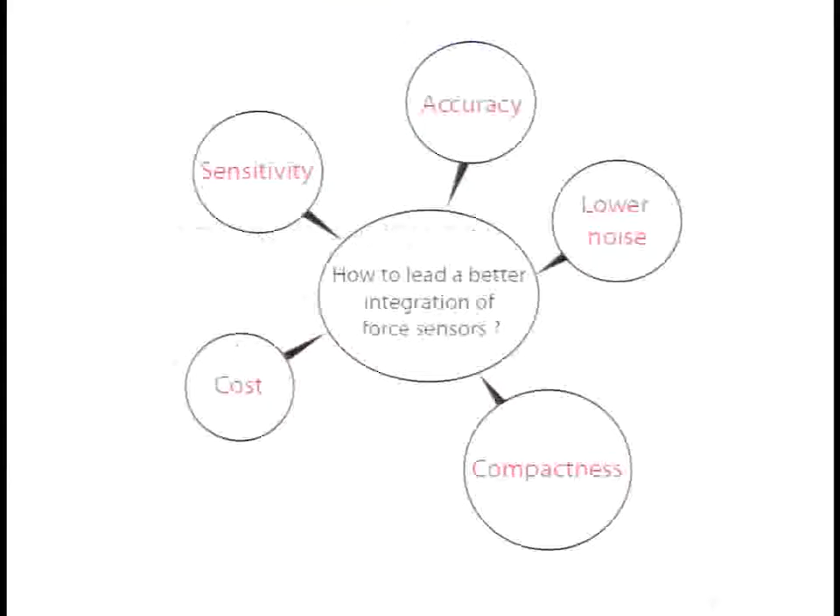The second question is how to spread their use. Of course, good sensitivity, better accuracy, lower noise, good compactness, and lower cost will lead to better integration of this kind of sensor in different applications.

The last question is how to improve their performance. We believe that the geometry of the mechanical structure combined with a proper displacement sensing technology are both important to enhance sensor performance.

To prove that, we tried to design a miniature 3-axial force sensor. First, to improve the shape of the mechanical structure, we used a symbolic mathematical model which links the applied wrench on the structure to the pre-selected displacement on the compliant structure. This model allows us to easily define the design constraints and choose the best shape for the mechanical structure.

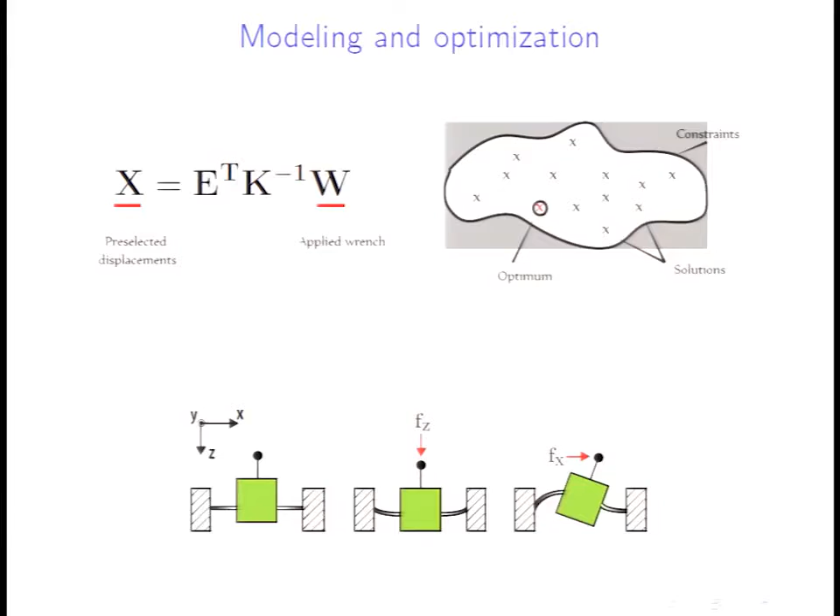We also used a capacitive sensing system containing 4 cells, and by doping the dielectric between the 2 conductive plates, we were able to improve the resolution and sensitivity of the sensor.

As a result, we obtained this prototype, a 3-axial force sensor. It was easy to fabricate, very sensitive, and it respects all the application design constraints. I'll be happy to present the prototype in the interactive session and answer more questions there. Thank you.

You may know sensory substitution from the human domain. A lost sensing modality is often replaced by processing a different domain. For example, a blind person can get acoustic signals telling something about the structure of the surrounding world.

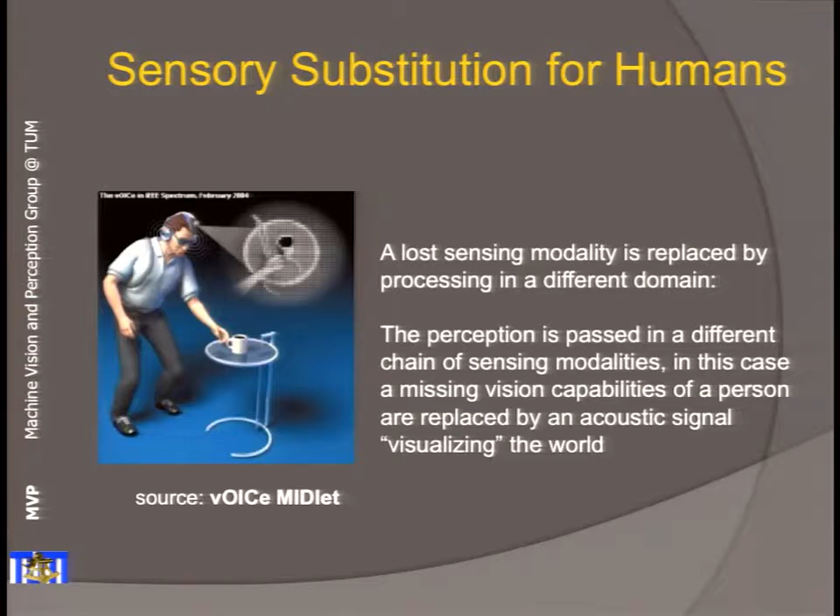We would like to move this to the robotic domain, where a typical service robot needs to sense a variety of sensor signals, which requires a large number of physical sensors. We would like to reduce that number just by applying the framework to create additional modes.

These virtual modes result in different processing chains. So there is a second task in our approach: to find the best configuration for the specific setup of frame rate, sensitivity, and measuring range.

What we're trying to combine is a set of physical sensors on the robot on the left side with modalities we want to develop on the right. And we provide a transformation graph for this.

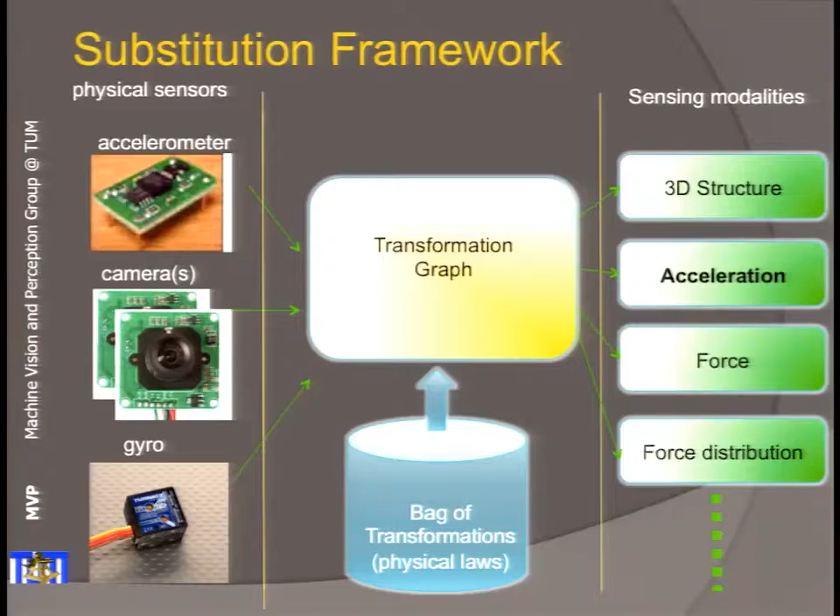This graph can be built based on a catalog of transformations. These transformations are actually based on physical laws, like Hooke's law, stretching of a surface to force, and things like this.

The graph contains transformation blocks, and we distinguish different types: some combining just 2 signals, some doing iterative combinations like gradients, or more complex structures. Each block has a complexity value attached to it and some description of the error propagation, which allows us to build an optimal graph.

For a specific combination of a physical sensor at the start and a goal sensor we want to develop, we can have different chains, and the optimality search tries to find the best solution in the graph to apply the sensor.

We tested it on several applications. Here, for example, an accelerometer: you can use an IMU to measure accelerations, but for slow accelerations the signal-to-noise ratio may be bad, so it may be better to use a camera for accelerations at slower rates. Here is the system developed by our framework.

A second example is a touch sensor consisting of a membrane with dots on it, and the camera measures the deflection of the points, telling you the force distribution and force magnitude from observation. This sensor gives you the additional possibility not only to measure the force, but also to distinguish what type of contact you have, if it's a hard surface or a soft, deformable surface.

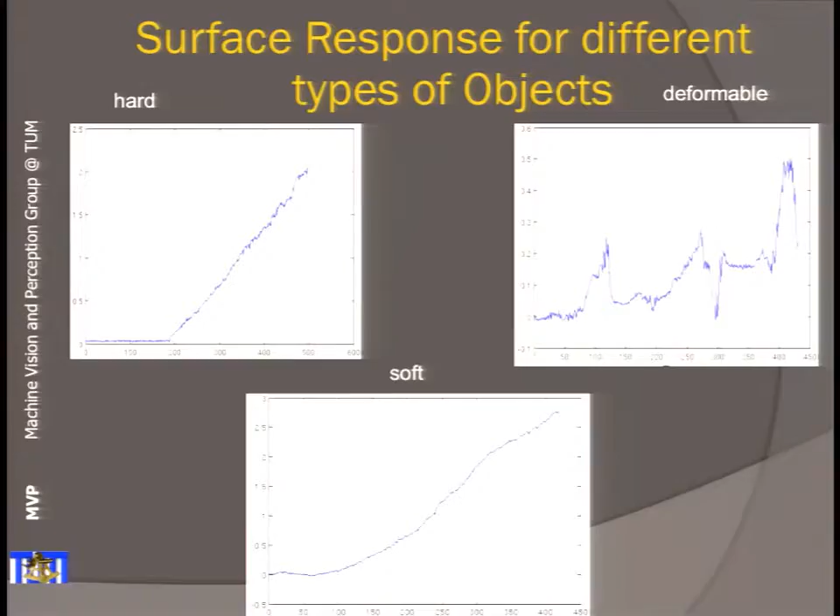Hello everyone, my name is Selman Sakar. I'm presenting on behalf of my colleagues from ETH Zurich and University of Zurich our new microrobotic platform for characterization of plant cells. Our main objective in this project is to measure both the mechanical and physical properties of pollen tubes while they are growing.

If we have a reliable method to characterize these properties, then we want to move on to look for key factors that play a role in biomechanics, which proteins, which ionic flows, etc. Then using the estimated parameters, we can develop computational models for predictive power.

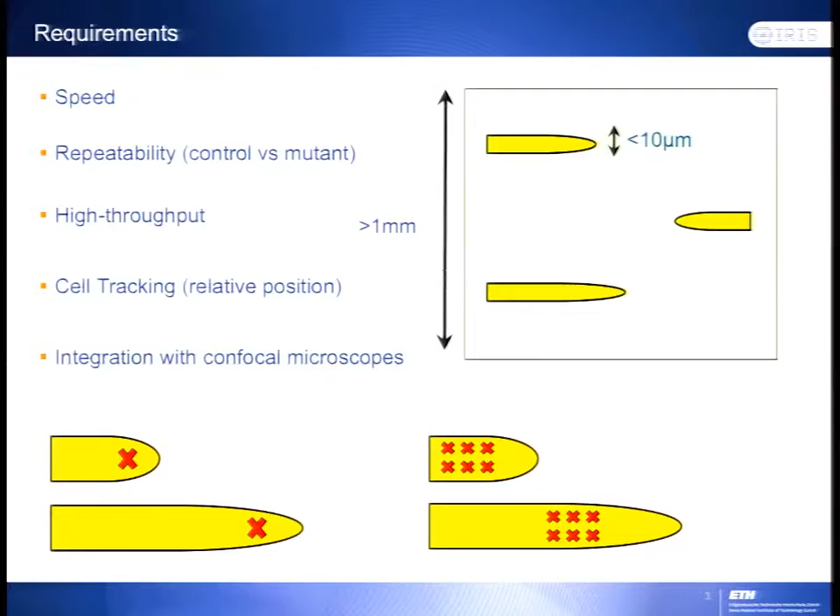The main requirements are we have to be fast because the workspace is relatively big - it's millimeter scale, but the cells are microscale. We want to characterize many cells while they are growing to get high throughput. We also need to track the cells while they are growing because we want to make measurements exactly at the same location, at the tip or at the stalk. We want to integrate the whole system with confocal microscopes so that we can do fluorescent microscopy.

This is the system. It's called the real-time cellular force microscope. The force resolution is around 5 nanonewtons, while the positional accuracy is 10 nanometers, and we can work in a large workspace.

There are four main modules in the system. I'll go through them quickly. First of all, we have a positioning system - two positioners connected to each other, one coarse and one fine, and we can benefit from both for speed and for high resolution.

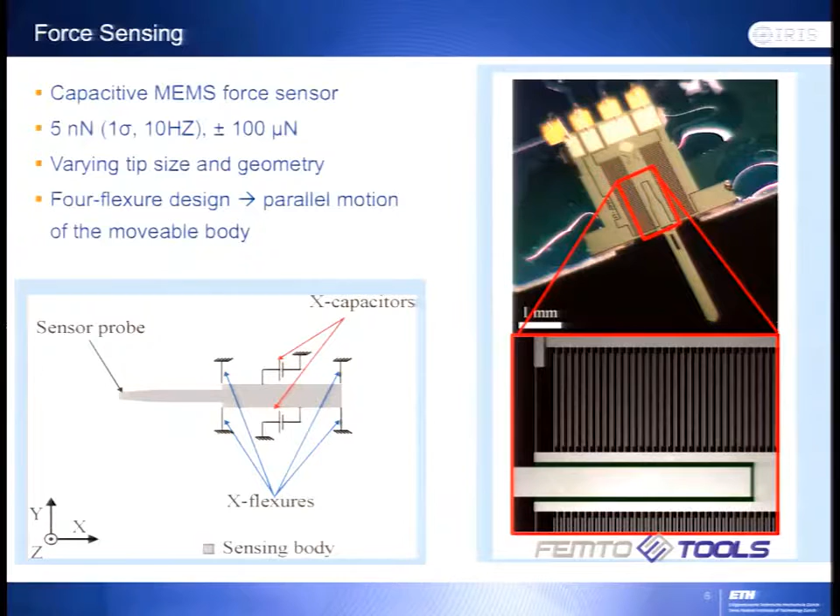The second module is the force sensing part. We are using capacitive MEMS force sensors - they are commercially available, FemtoTools is a spin-off from our lab. The third module is the acquisition and control part, using real-time computers and FPGA. The fourth is the computer vision automation.

Using this system, we could measure stiffness at different locations during cell growth, and we could generate stiffness and topography maps while they are growing. For one measurement, it takes around 1.5 seconds, so it's quite fast.

Lastly, we generated these strains with fluorescent calcium so that we can measure these fluxes, and this is real time. So while the cell is growing, we mechanically stimulate and look at calcium, how it changes, and move on. We can make the measurement at exactly the same location relative to the tip so that we can make comparisons afterwards.

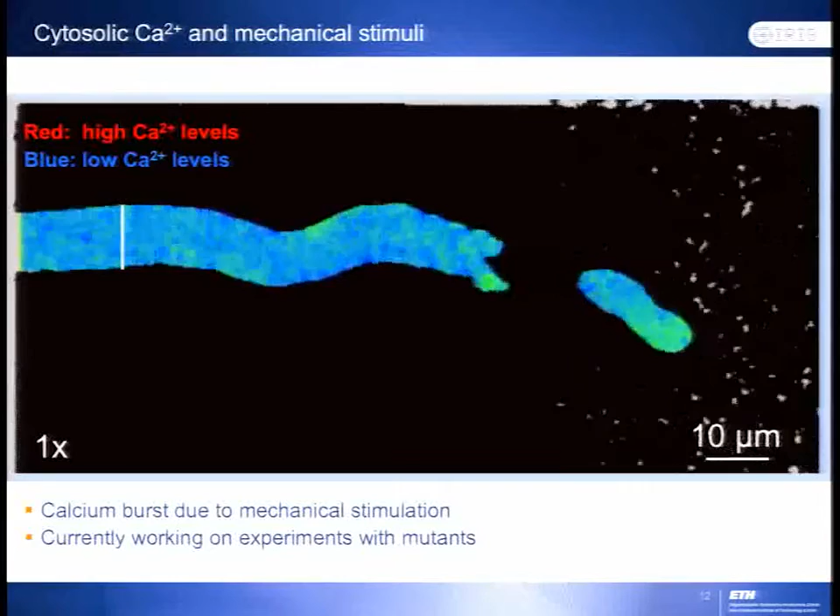Hello everyone, my name is Prangular. I'm a PhD student at KTH, and today I will present you our work which is about content classification.

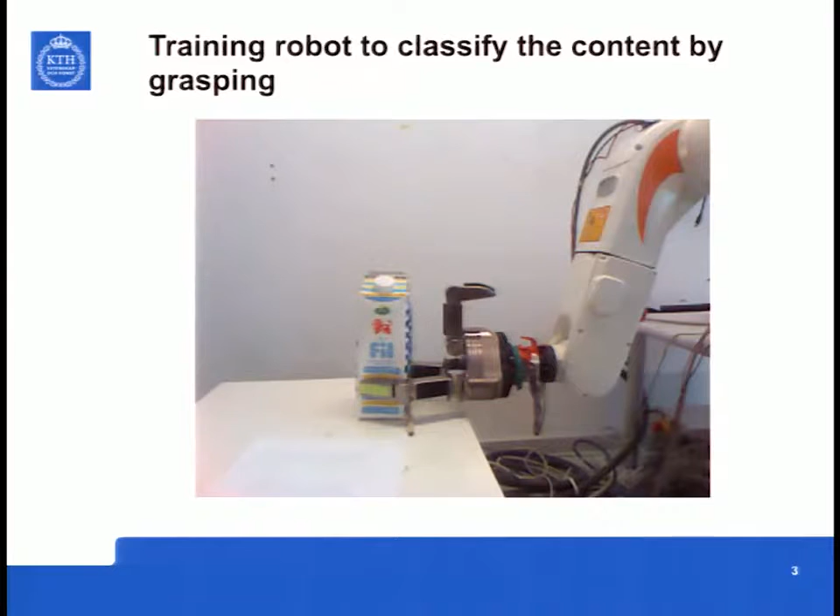In household environments, interacting with different kinds of contents in containers is an important task because wrong manipulation can cause some hazardous results like spilling. So in order to prevent this kind of failure, we train our robot to classify the content in the containers by grasping them and then collecting visual and tactile data.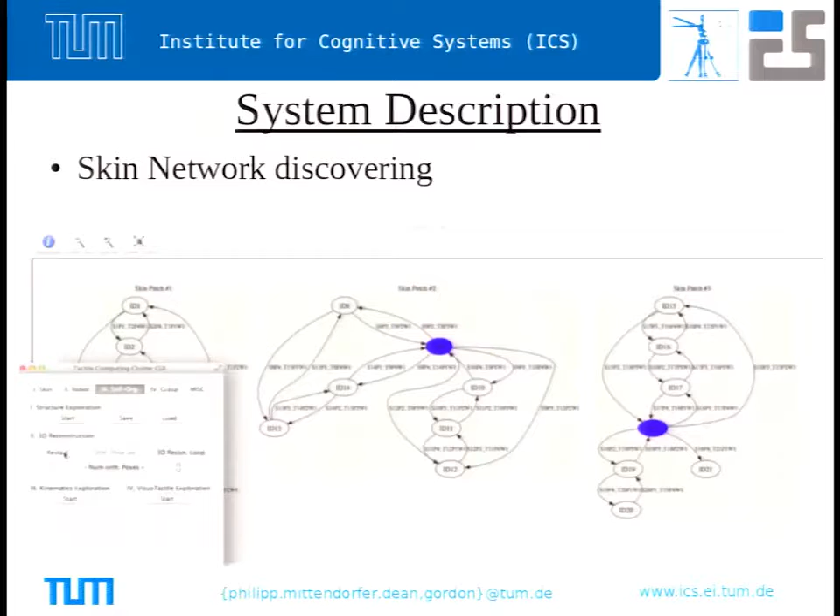The methodology has been tested in different scenarios. For example, this one, which is a single patch calibration in normal conditions, but also large patch calibration considering occlusion. We also have tested our system in multiple patch calibration with a large number of cells, for example, the one we use in our robot, which a single patch can contain hundreds of cells.

The results obtained from this calibration process can be directly used for designing controls to change the dynamic behavior of robots. In this case, we can show that we have non-compliant robots and we can make it compliant. We can also use the modalities of the sensor to create a collision avoidance system in the robot.

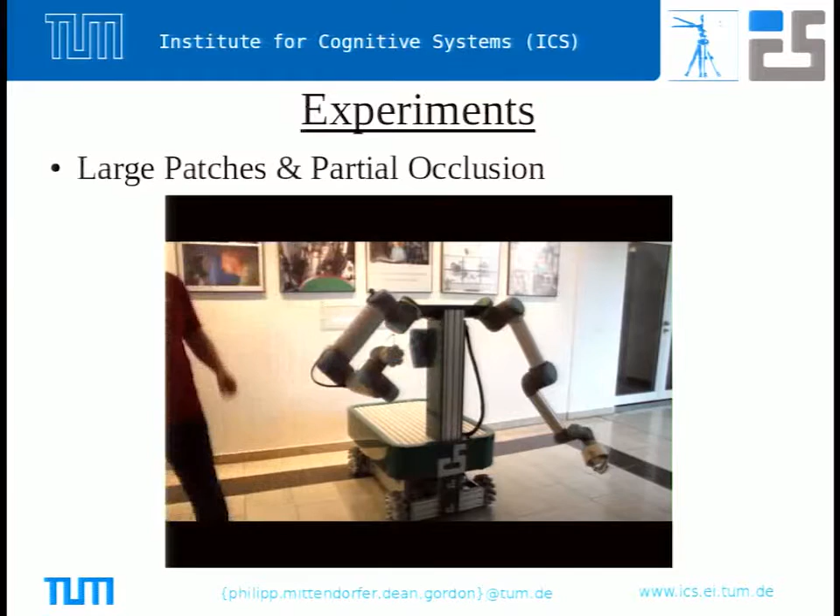Minimally invasive medical interventions brought a lot of benefit for the patients, such as short recovery time and small scar after surgery and so on. However, the doctors lose their benefit from touch sensation because they're no longer allowed to put their hands inside a body like open surgery in the past.

To overcome this lack of touch sensation, we designed a force-sensing needle and 1-degree freedom haptic feedback system, which can read and deliver the interaction forces between the tool tip and the tissue. Especially, we are going to talk about how force-sensing location makes a difference in membrane puncture detection, which is a very simple but most common task during needle intervention.

First challenge of reading interaction forces was minimizing the effect from friction force along the needle. To minimize the friction force, we wanted to put the sensor at the tip. However, most commercial force sensors are too big to implement it. So we use an FBG sensor, which reflects a specific wavelength depending on the strain of the optical fiber. We also added small features at the needle tip to increase the axial sensitivity of this force sensing needle.

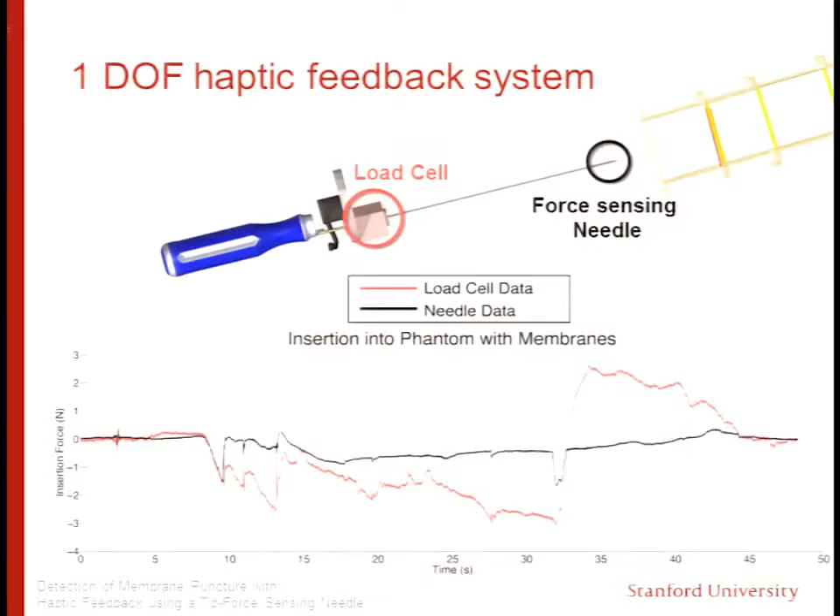An interesting thing was observed when comparing the force at the tip and the force at the base. We tapped a plastic block with this tool several times. As you can see here, the readings from both locations look very similar. However, when you insert this tool into a phantom which has 3 membranes inside, it shows different results. Because of the friction, you could see the direct force effect from the data at the base.

To explore this further, we built a 1-degree freedom haptic feedback system. The user holds this haptic display and pushes the needle into the phantom. A total of 10 healthy users were asked to stop when they feel membrane puncture from the haptic display. The haptic feedback mode was selected randomly, and from this user test, we could see that haptic feedback based on tip force sensing gives a higher success rate in membrane detection.

In conclusion, tip force sensing resulted in a higher membrane detection rate than feedback based on other sensors. We recently designed a multi-DOF haptic display, and we plan to test it with physicians in the future.

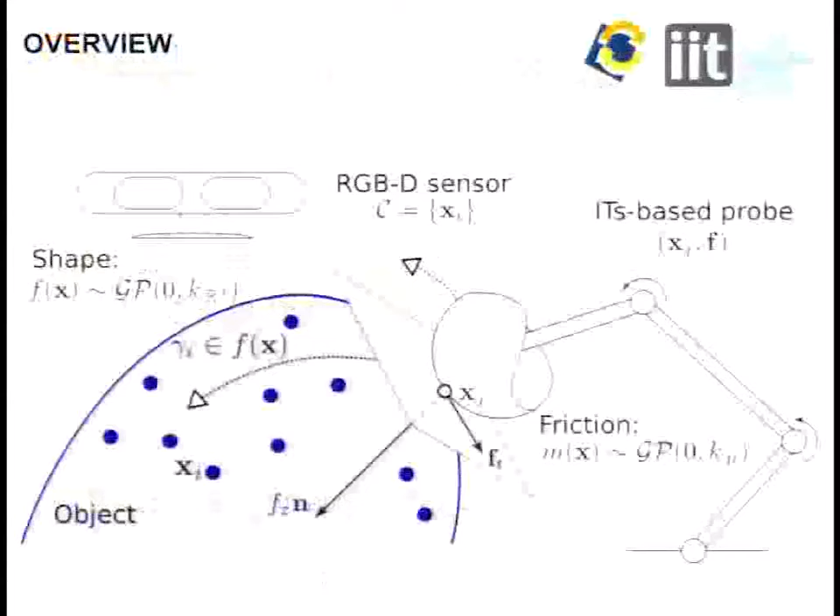Our setup consists basically of a robotic fingertip and a probe, and we want to use this robotic fingertip and a tactile sensor in order to gain information about the shape of the object of the probe and its friction coefficient. For doing this, we use the intrinsic tactile sensor.

The intrinsic tactile sensor is composed of a force torque sensor and a fingertip. From this sensor, we can measure contact point and force at contact. Then we have a KUKA arm, and we have an RGBD sensor for the point cloud of the scene.

The shape and the friction coefficient over the surface of the object are approximated by a Gaussian process. The implicit function representing the shape is exploited for the exploratory strategy.

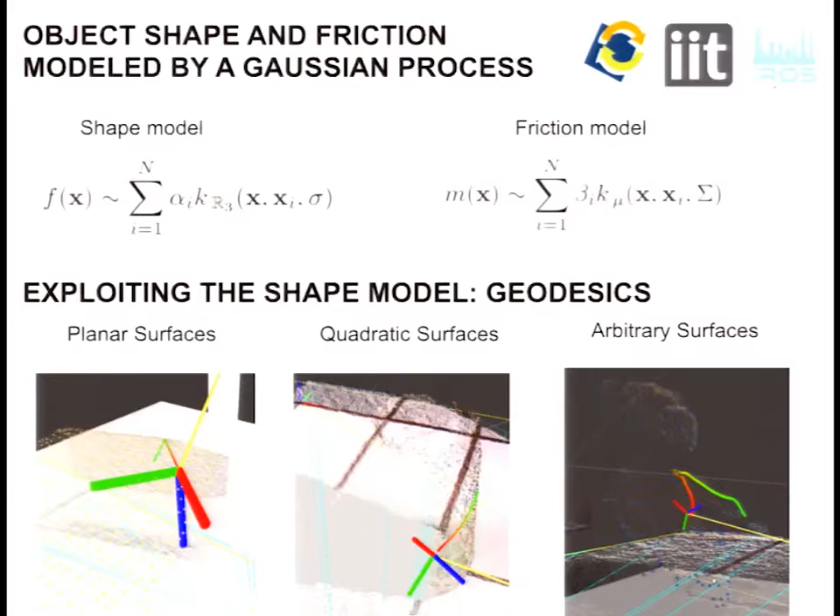We use a Cartesian impedance controller. Here, KC is the Cartesian impedance, XD is related to the trajectory, while FD is the desired force in order to keep the fingertip in contact with the object.

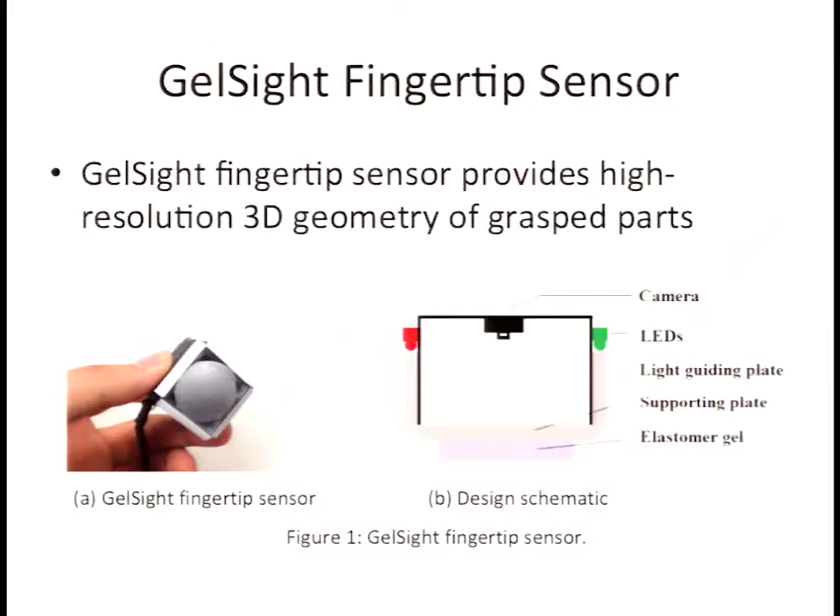We use the sensor to demonstrate USB insertion that requires sub-millimeter accuracy. We hang the USB cable freely in the air and mount the GelSight sensor on the gripper's backside. The robot then grasps the USB connector, estimates its pose, and inserts it into the socket on the table.

To do the insertion, we first create a 3D tactile map of the USB connector by registering GelSight images of the USB connector. Next, the robot localizes the USB pose in its gripper using a feature matching method.

With inverse kinematics, the Baxter robot can do the USB insertion with high accuracy. This is a video showing one of the insertion experiments. Out of 36 insertion experiments with different USB poses, 34 were successful.

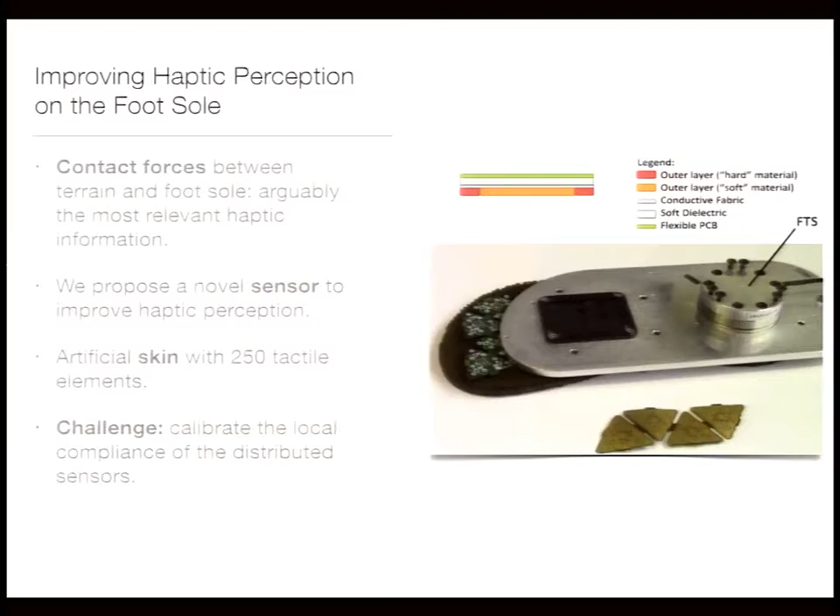The main idea we implemented was to consider all the tactile sensors on the skin to be local springs, and to estimate the elastic coefficient for these springs. So this is the model we get, which is actually pretty simple. If you come to the interactive section, I'll describe it in detail.

We both localized the skin sensors with respect to a reference frame common to all of them, and estimated the compliance coefficients of these sensors.

Experiments were performed on two different settings. The first was where we probed the skin normally with respect to the entire surface. Then we tried to generalize the estimation on a different, more natural setting, performed while the iCub was standing on a spherical surface.

So yeah, we got some good results in this way, and I'm happy to discuss them later in the interactive section. Thank you.

Good afternoon. Since I'm the last one, Allison said I could have 20 minutes. This is the work of two of my former postdocs: Frank Hammond, who will join Georgia Tech as a faculty member, and Yigit Menguc, who's just now joined as a faculty member at Oregon State.

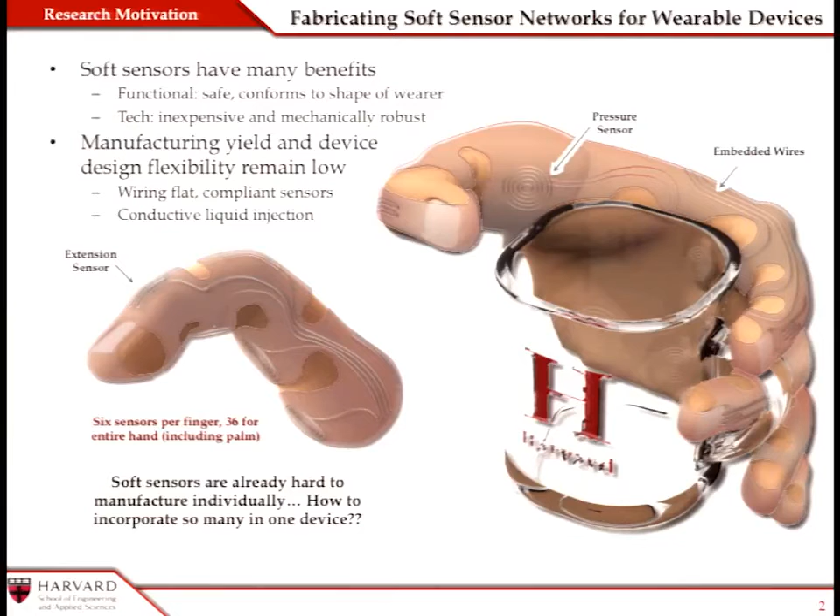I'll describe briefly a couple of the innovations in this paper. The first is embedding wiring directly within these two-dimensional molds. In the past, if you wanted to sense an extension, you'd have more or less a strain gauge pattern in these sensors, such that as you stretch them, the resistance changes and you read them out just as you would a strain gauge.

Similarly for a pressure sensor, it's more of a serpentine or coil pattern, where normal pressure to the surface collapses the channels and changes the resistivity as well. So the wiring for these was a challenge. We made some simple adjustments by having the wires in-molded into the structures while they're being manufactured, which in the past was an afterthought.

The other thing we tried to do was figure out ways to make modular connections between these physical sensors. If you've got 30-something sensors on a hand and do it all at once, you have to create a very complicated mold. So we wanted to create molds for individual sensors that we then clamped together, and we tested a number of different ways to do that.

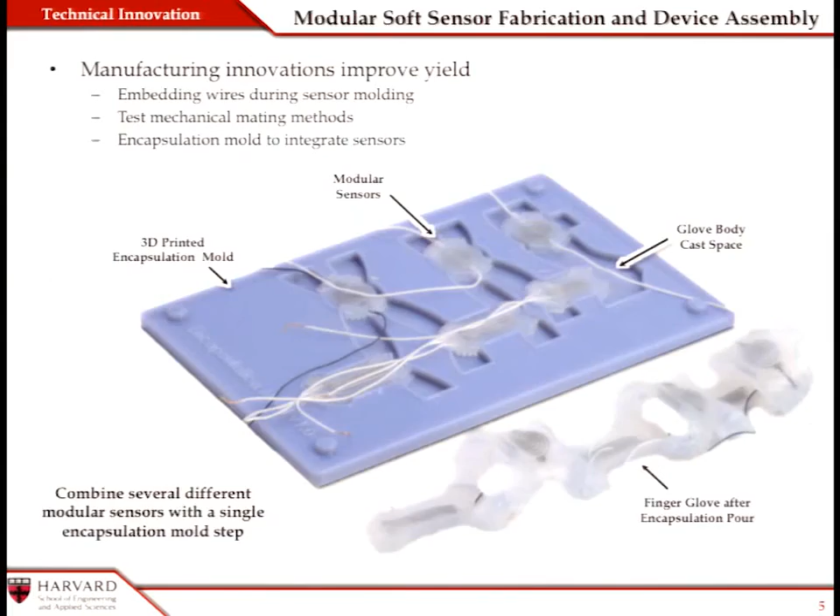The last thing we did was once all the sensors are created and wired, we did a final molding and encapsulation step, then plugged these all in. This is a demonstration of 6 sensors - 3 extension, 3 pressure sensors - on a single finger, where you can put this on your finger, do various grasp activities, measure pressures and motions, and extract useful information.